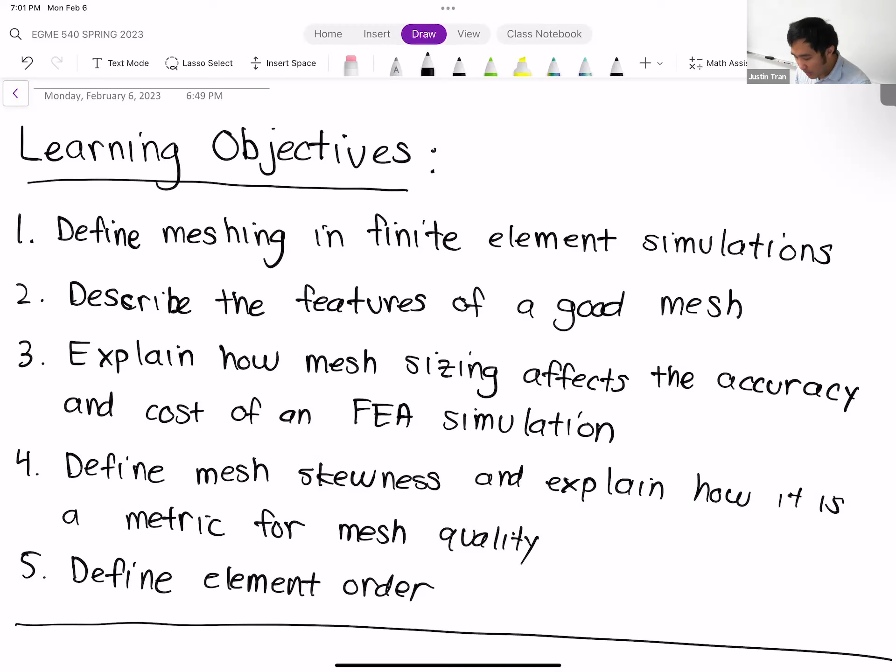So the topic for today is going to be meshing. In particular, we're going to be talking about what I call meshing basics.

In reality, meshing is a very deep topic. It's probably the most that we can talk about in this class in terms of ANSYS. There's a lot we can talk about with meshing, and we are going to revisit it several different times in the semester. But for this first part of the class, I think I'd talk about what meshing is in general, what the purpose of it is, what we're looking for in the mesh, just to help us with our first few activities.

All right, so first let's define what meshing means. The act of meshing in a finite element context is to take your complicated geometry, your complicated CAD model, and break it up into a bunch of simpler geometries.

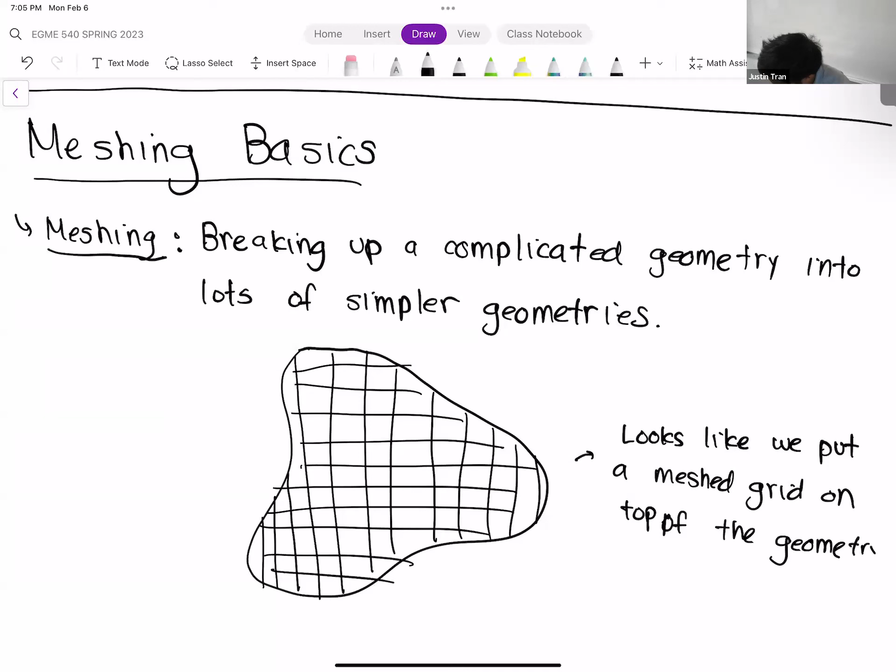And so the reason we do this is that the finite element algorithms, the algorithms that are programmed into the computer, work in such a way that you solve the governing equations on a geometry with a fixed orientation, okay?

You can almost consider it hard coded into the FEA code. The FEA code knows how to solve the structural equation on a square and a triangle. It's kind of designed to do just that. So basically what the FEA algorithm says is, if you can get the geometry into a situation where you have a bunch of triangles, then it'll allow you to solve for the solutions onto those triangles. That's the reason we do that.

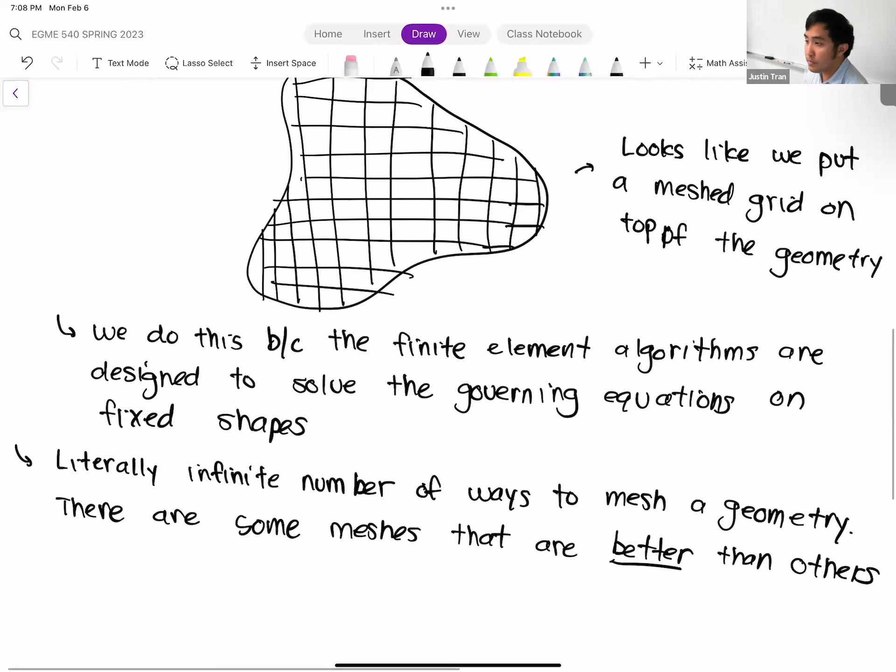So what we're going to be talking about today are just some of the basic indicators that tell you what makes a mesh better than another one, what you're going to generally be looking for in a mesh, so you can get started with that analysis. Any questions on this so far?

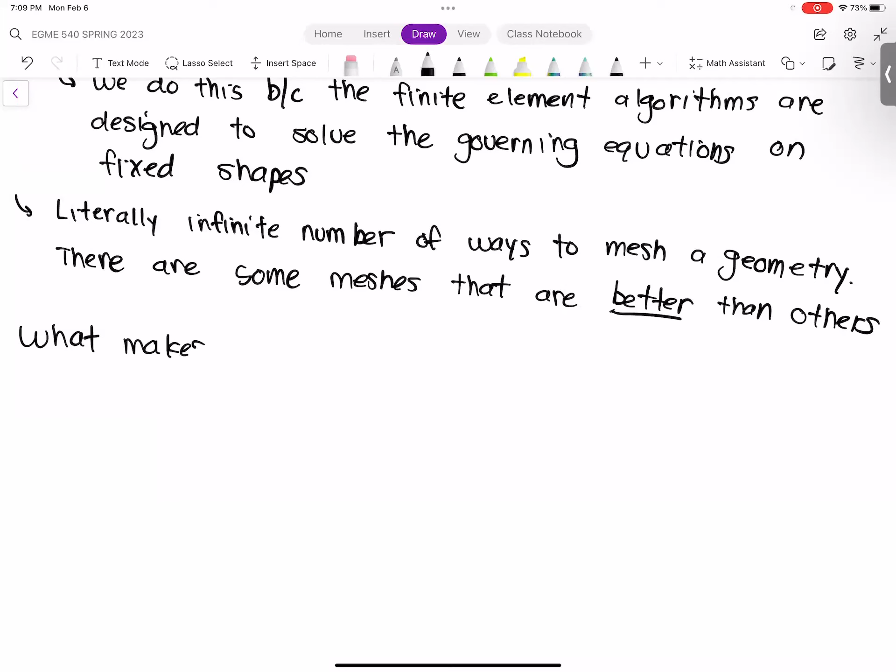So the next section is going to be titled: what exactly makes a good mesh?

Hello, can you hear me?

It's a very loaded question, but I think we can give a simple definition. Simply put, I think what makes a good mesh is one that will produce an accurate finite element simulation result.

Oh, sorry about that. I think it's been muted since last week. I haven't been able to get any microphone output since then. It sounds good, sorry about that. If you want to type your questions in the chat, that's probably the best way. I appreciate you guys trying to help me out, that's very nice of you. Check your audio settings, speakers. Can someone try speaking, maybe see if that works? Okay, yes, I just had to switch the speakers. I was trying to speak up, but I want to say thank you to my classmates online in Zoom who got your attention, I greatly appreciate it, that's very nice of you.

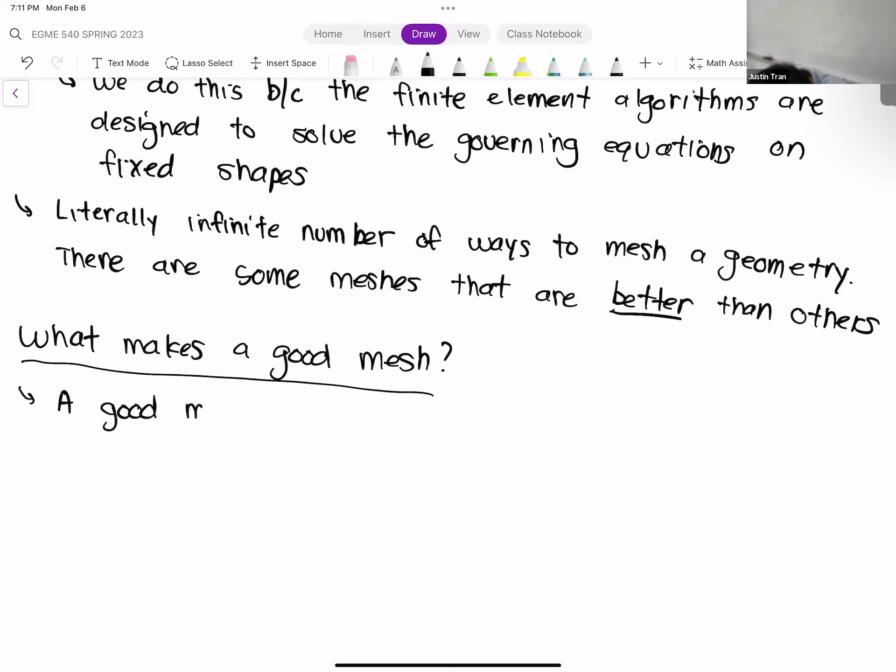So what makes a good mesh? A good mesh is basically something that will produce a simulation that is as accurate as possible with the least amount of cost as possible.

So it kind of sounds like you're shopping for laundry detergent, right? You want to buy the detergent that'll get your clothes the cleanest for the least amount of cost, but that's kind of what it ends up being. I've underlined two words there because I want to focus on those, and how your mesh influences the accuracy and influences the cost of your simulation.

All right, so let's talk about accuracy first. When we talk about accuracy, what we refer to is basically how closely your finite element simulation reflects or emulates the realistic situation it's trying to simulate.

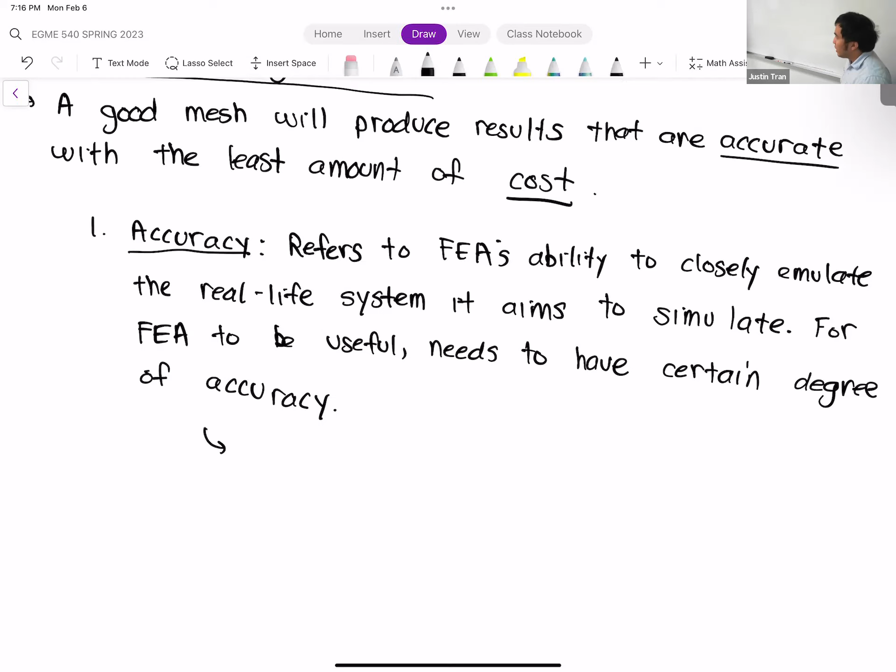So we're going to talk about something called a mesh convergence test. That's a test you can do without any real world data to show that your simulation results are as accurate as they can be for your mesh. There are tests like that to test and see you've at least eliminated a lot of the sources of common error in FEA. Sounds good. Thank you, sir.

Right. And so how does the mesh affect your accuracy? Generally speaking, the smaller your elements are, the more accurate your simulation is going to be.

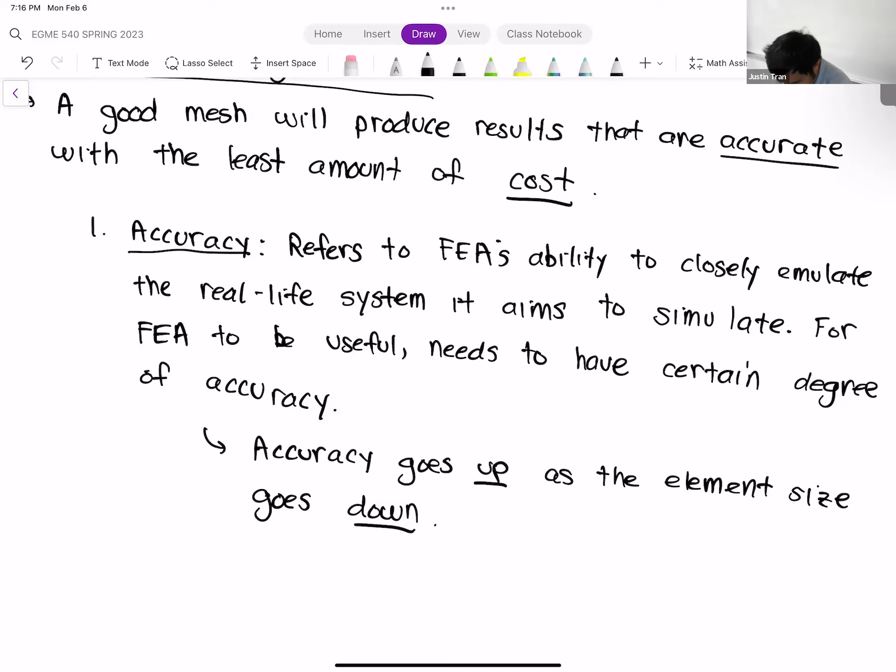And so the smaller you make your elements, generally speaking, it's going to increase the amount of elements in your mesh. So as the element size goes down, then you can expect the accuracy to go up. And the reason for this is that when you run an FEA simulation, what FEA is doing is forming an approximation for what the solution is going to look like on that element.

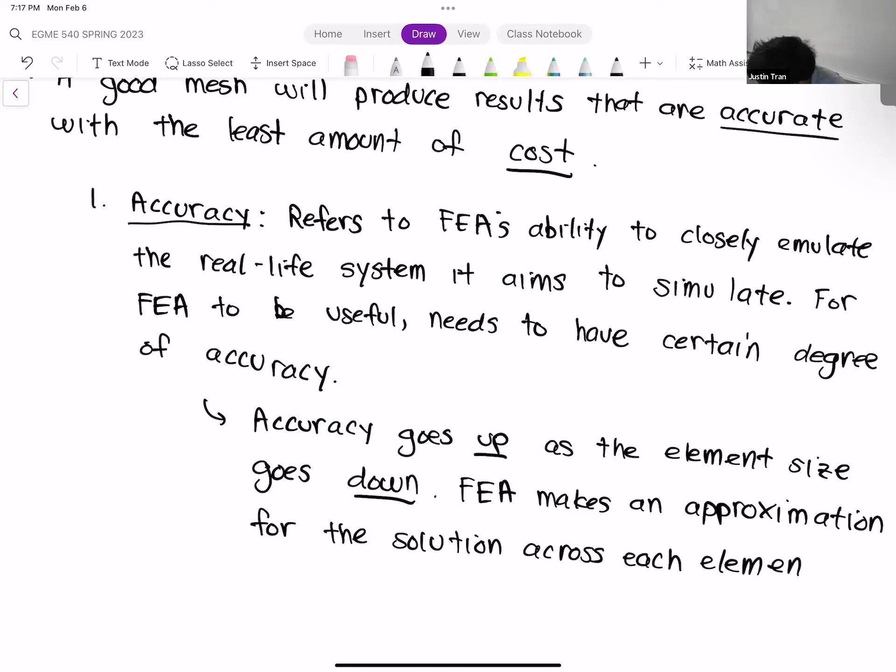And so by reducing the size of the elements, by making the elements smaller, you're basically reducing the amount of approximation it has to do. So in other words, to sum this up, from an accuracy point of view, you want smaller elements because that's what's going to give you a higher quality, more accurate simulation.

So accuracy is the first main consideration to make when you're making your mesh. The other consideration to make is cost. By cost, I don't mean financial cost, although you can interpret it that way. By cost, what I mean is mostly time and memory.

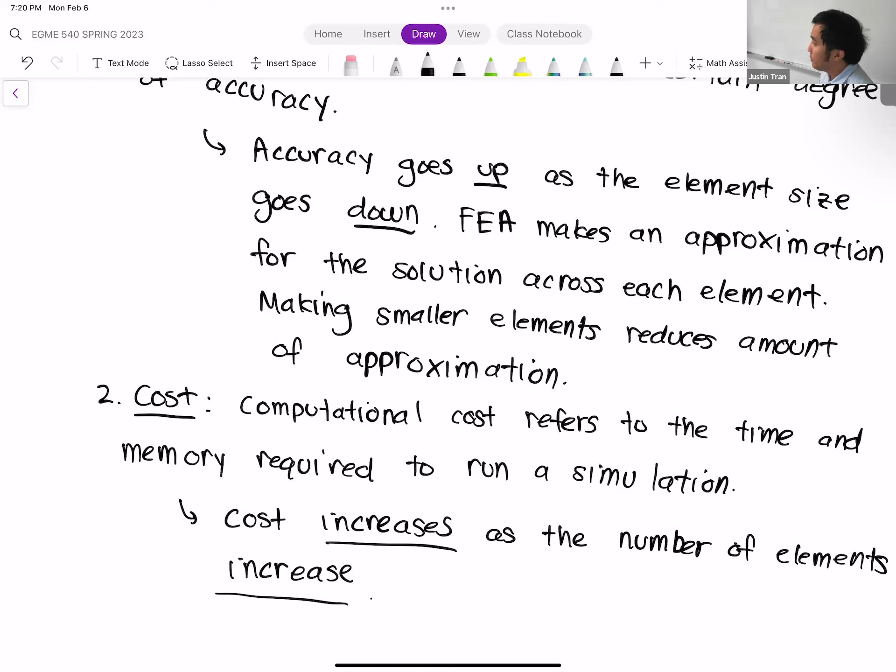And so if you remember from the first activity, one thing I had you do for each mesh was log down how many elements are in the mesh, how many nodes are in the mesh. And so that right there is kind of an indication for how expensive it's going to be.

I will say that for a lot of the simulations we're going to do in this class, you're not really going to notice a difference in the cost. So you're going to run a simulation on maybe a 5,000 element mesh, and then run the same simulation on 15,000 elements. You're not really going to see that big a difference. It might be a difference of like 30 seconds or something like that.

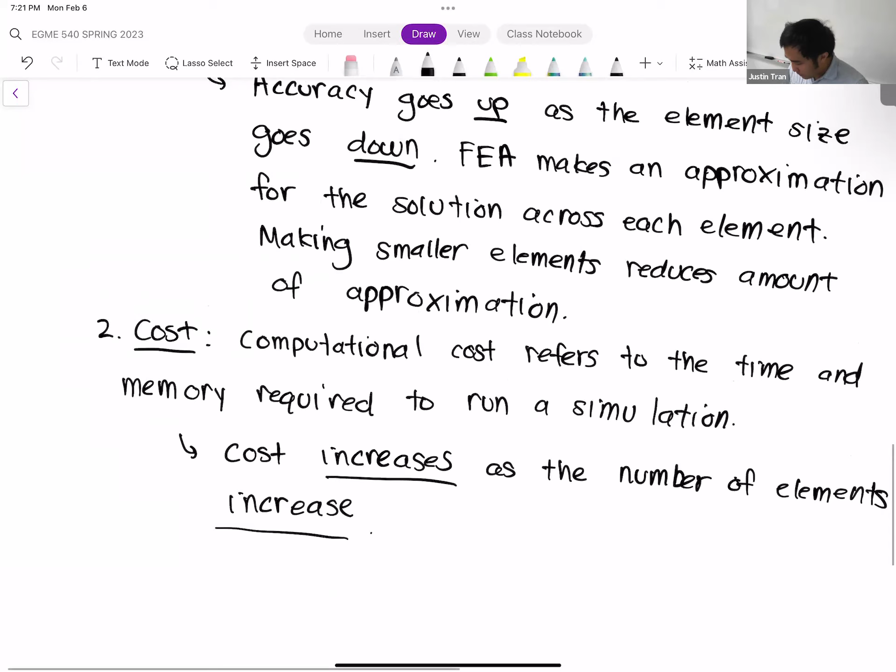And so that may seem insignificant, but for a lot of practical cases, when you're looking at meshes with element counts in the millions or even tens or hundreds of millions, that's where cost really starts to become a factor, because you're talking about a difference of maybe your simulation finishing in 5 days versus 3 weeks. And so that really becomes an issue.

Okay, so we have these two factors you're considering for the mesh: accuracy and cost. If you'll notice, these two factors are competing. From an accuracy point of view, you want smaller elements, more elements, because that produces a more accurate solution. But on the other hand, you have this cost consideration where you don't want too many elements, otherwise your simulation is going to take forever and blow up your computer. So oftentimes, cost and accuracy are opposing considerations when you're doing an FEA simulation.

Dr. Tran, do you think costs will continue to be a major increase in FEA, even though computers are getting more powerful with time? Do you think that will still be an influencing factor no matter what?

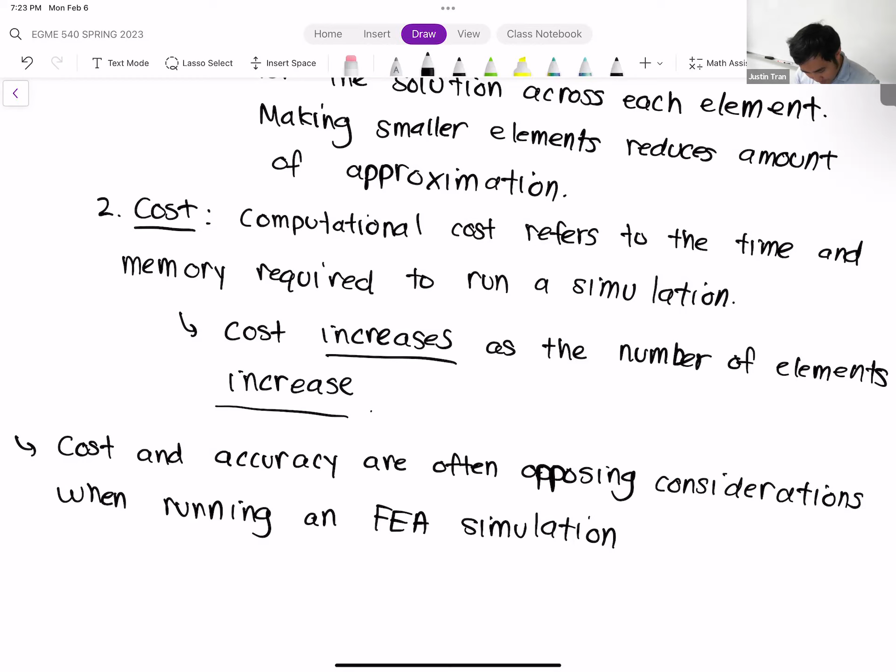I think it's going to keep continuing like that for a very long time, because there are a lot of problems right now which people think are unsolvable because they don't think the computer power is enough. But the computers will get there eventually, and then we'll just come up with more problems that are unsolvable. So it's a never-ending cycle. It's a huge area for research.

Okay, so the question is, if these two are opposing considerations, how do you find the balance between them? Obviously you can't have a very accurate simulation, because that's going to take too long. But you also can't have a very cheap simulation, because that's going to have no accuracy at all. So how do you balance these? Or where do you find the right balance?

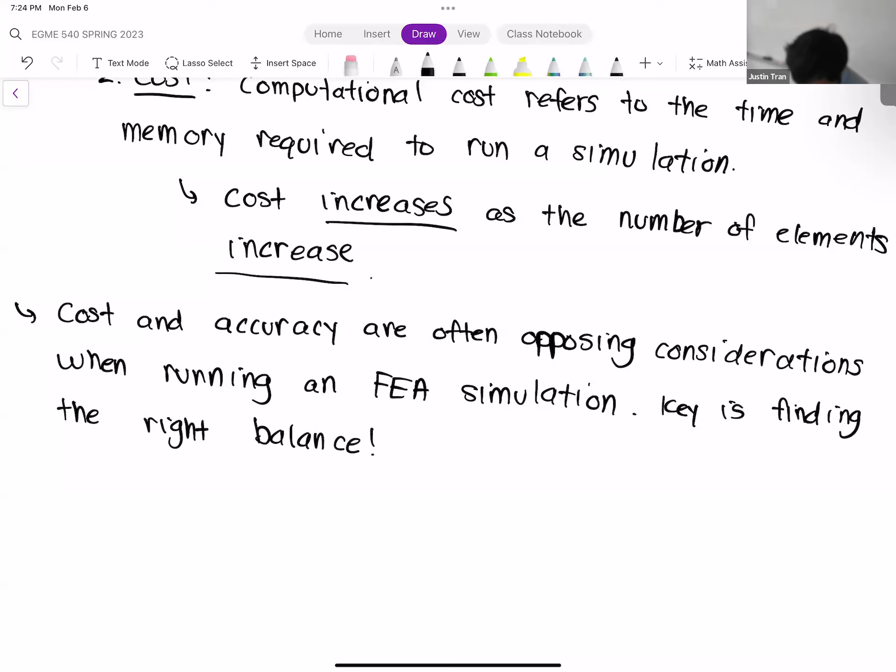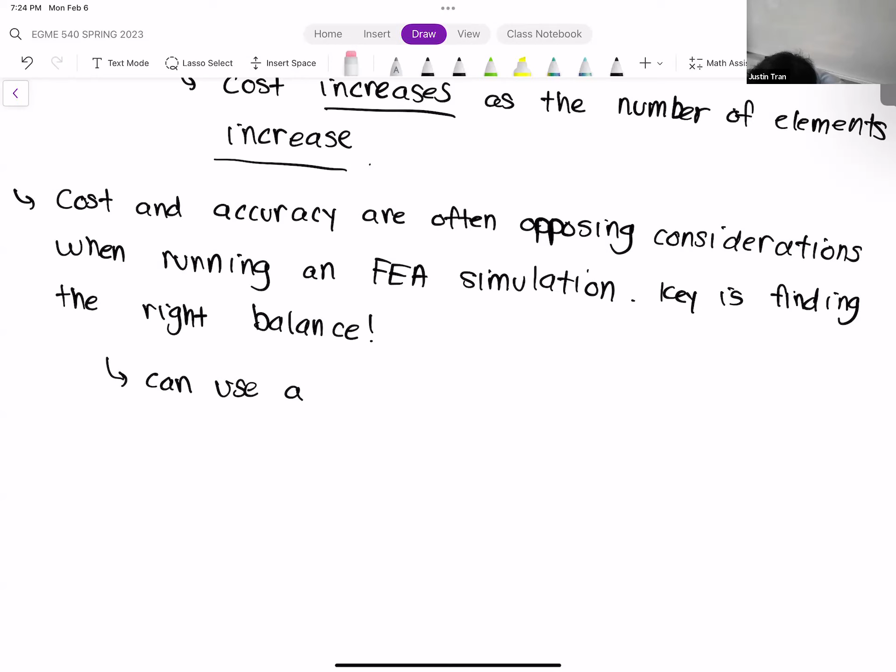All right, so we'll talk about this a lot more later in the course once we talk about verification and validation. But a very common test that people run whenever they're doing any kind of practical FEA is something called a mesh convergence test.

I don't want to write down too much about it, since it won't be relevant until later. But basically, with the mesh convergence test, you run the same simulation over and over again on different meshes. You typically start with a fairly coarse mesh, with very few elements, run the simulation, and record the results. Then you successively increase the resolution of the mesh and rerun the same simulation, looking at how your results change. Eventually, once you refine the mesh to a certain point, refining it even more won't change the simulation results. At that point, you've reached what's called mesh convergence, meaning your simulation no longer depends on the mesh, and you've reached the maximum accuracy you can with that mesh.

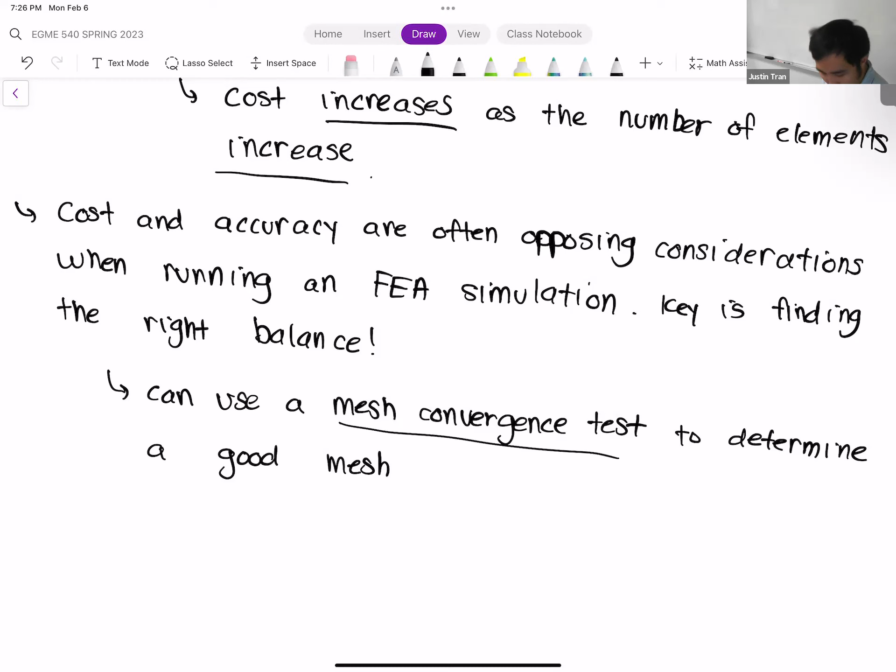So if you're going to do any kind of technical reporting or research with finite elements, a mesh convergence test is almost necessary, because that's always the first question people ask: is this mesh accurate enough for what you're trying to accomplish? A mesh convergence test is the best way to determine that. We'll talk about that a lot more later on in the course. I don't think it'll be part of your midterm project, but it will be part of your final project, so we'll discuss it closer to that time.

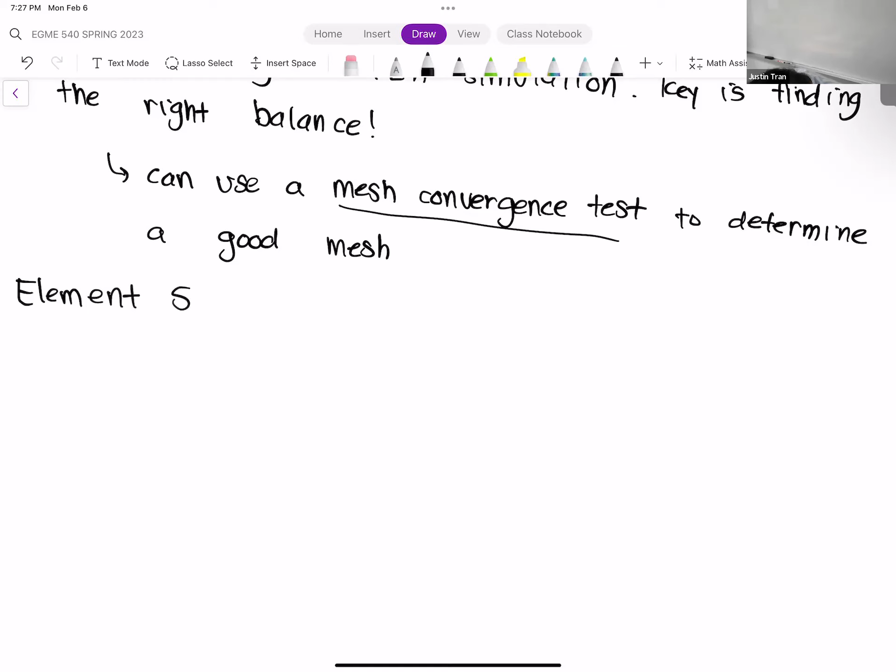For now, the only thing you have to keep in mind is this relationship between cost and accuracy. So when you're choosing your mesh size, you have to do it thoughtfully, knowing that when you make the elements smaller, you're increasing the accuracy, but you're also increasing the cost at the same time. Any questions on this?

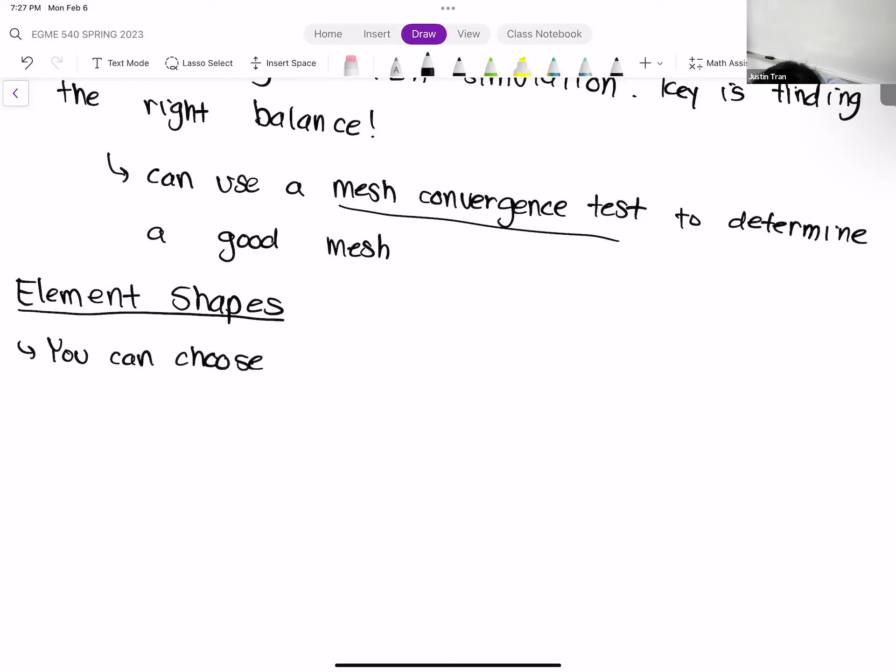All right, so let's talk about element shapes. Just like I alluded to earlier, when you're creating a finite element mesh, you have some latitude in terms of what shapes you can choose for your finite elements. In reality, in theory, almost any shape can work as long as you can write the algorithms for it. But for most practical situations, we have two categories of shapes that you can choose.

I call them categories because they have a 2D version and a 3D version, but they have very similar behaviors. The two categories are the triangular shapes and the rectangular shapes. Let me draw a table here to show you their differences. There's a 2D version for these and a 3D version. First column here, we'll do triangular shapes, and then on the right will be the rectangular. Okay, so let's start with a 2D triangular shape.

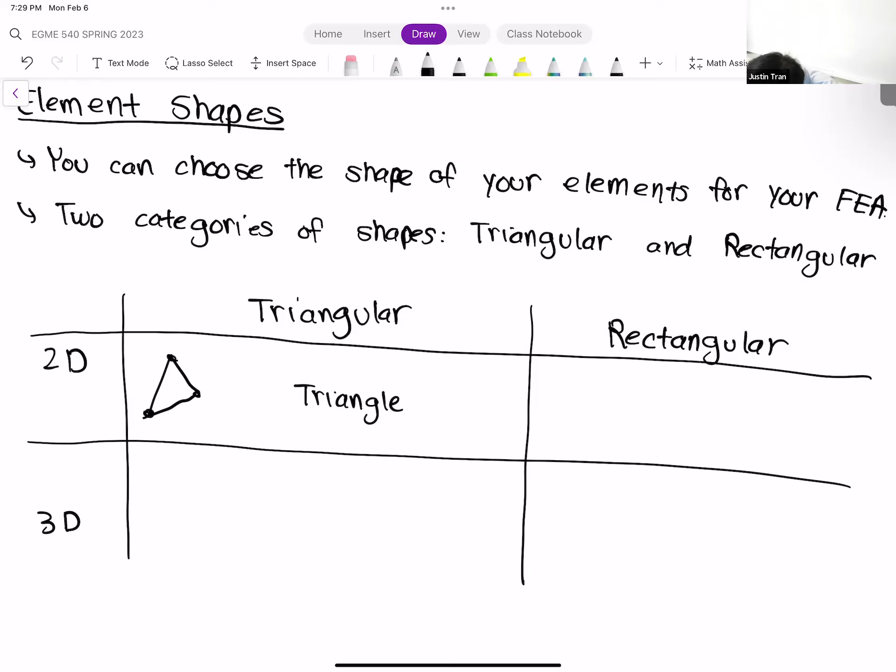This was pretty straightforward. A 2D triangular shape is literally a triangle. And then the rectangular 2D shape is a rectangle. Big surprise. But we usually call this rectangle a quadrilateral because it has 4 sides and 4 corners.

Dr. Tran, this popped up into my head seeing those two drawings. Is it safe to say that a triangle is more accurate than a rectangle because it's half a rectangle, quote unquote? Not necessarily. We'll talk about their differences soon. Let me get through the 3D one and we'll talk about where the triangular shapes are better than the rectangular ones, because they're good in certain situations.

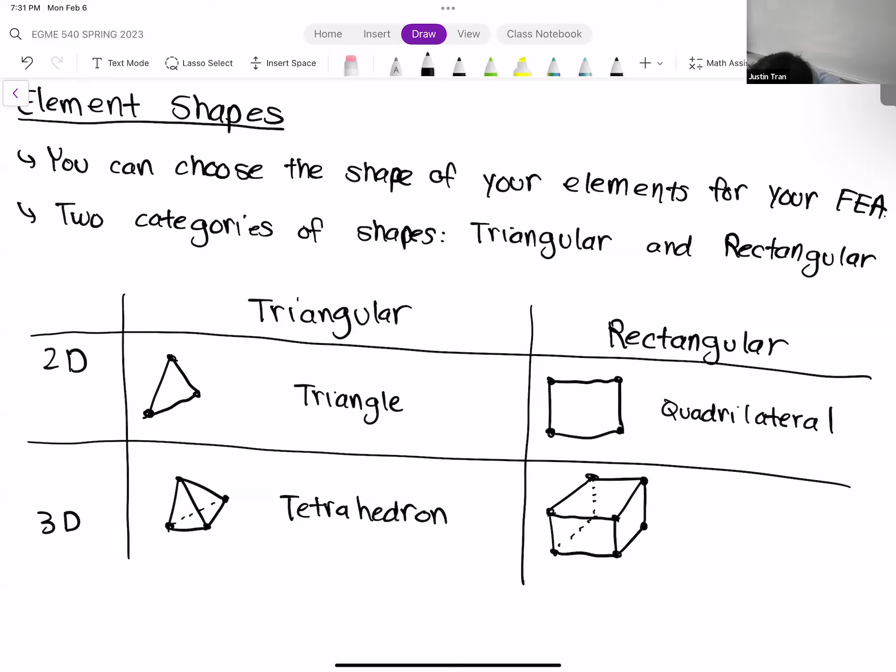Okay, so the 3D triangular shape is a 4-sided pyramid, and this is often called a tetrahedron. And the 3-dimensional rectangular shape is a box. Some people call it a brick, but we call these hexahedrons. Hexahedron because they have 6 sides, basically.

So these are your options when you're choosing element shapes within ANSYS. I think a lot of custom codes have the ability for other shapes, but generally this is all your options. So what are the differences between these shapes besides their visual differences? Let's talk about the triangular shapes first. This applies to both the 2D triangle as well as the 3D tetrahedron.

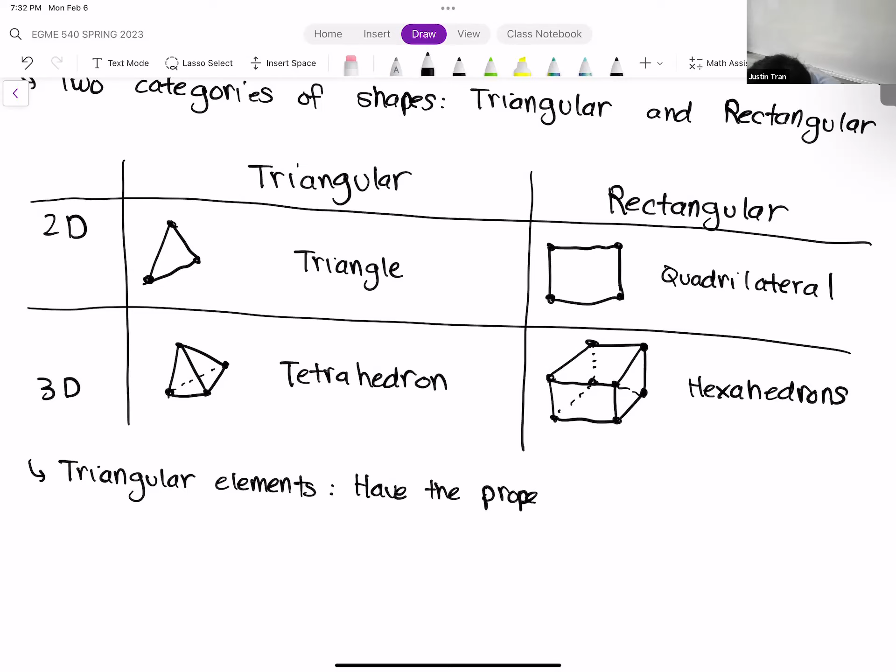The really nice property about triangular shapes is that they have what's called the simplex property. What that means is that if you wanted to, you can take any geometry, literally any geometry, and you can mesh it with triangular elements.

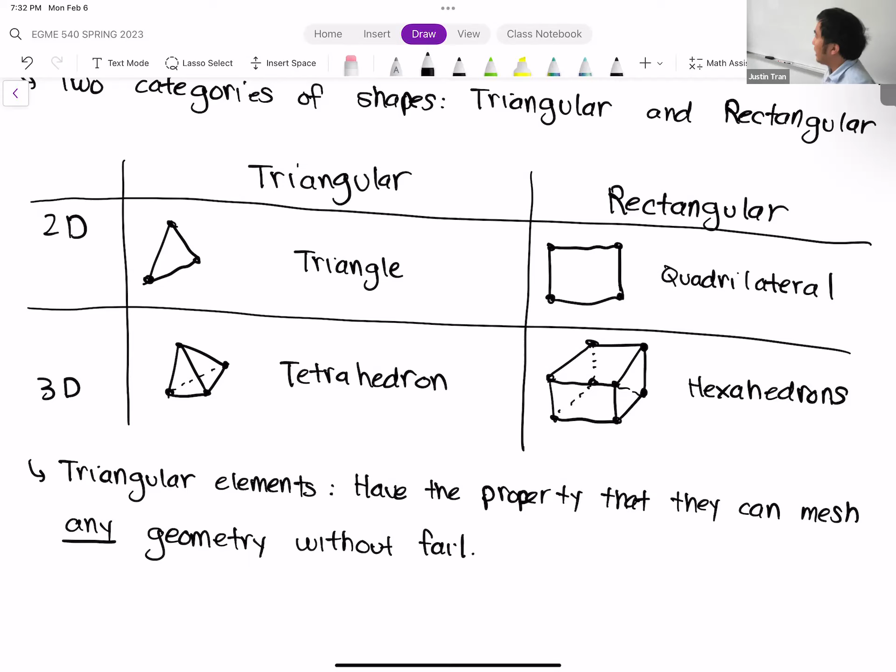You guys have a question over there? And the reason for this is that, like I mentioned, this is something called the simplex property, and what that basically means is that you can fill any space with triangles. Dr. Tran, can you please write that down? The simplex property? I'm writing it down right now. Thank you, sir.

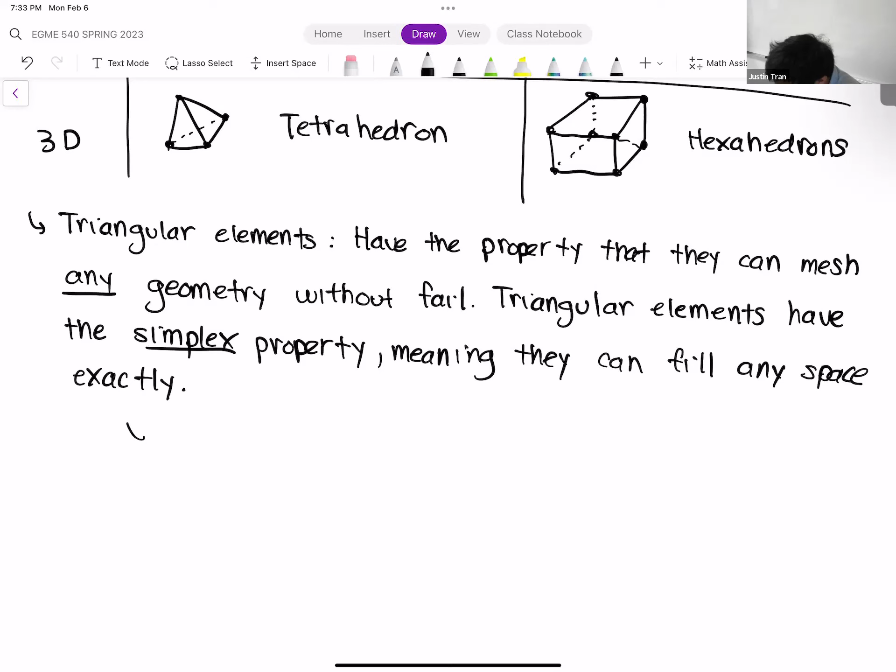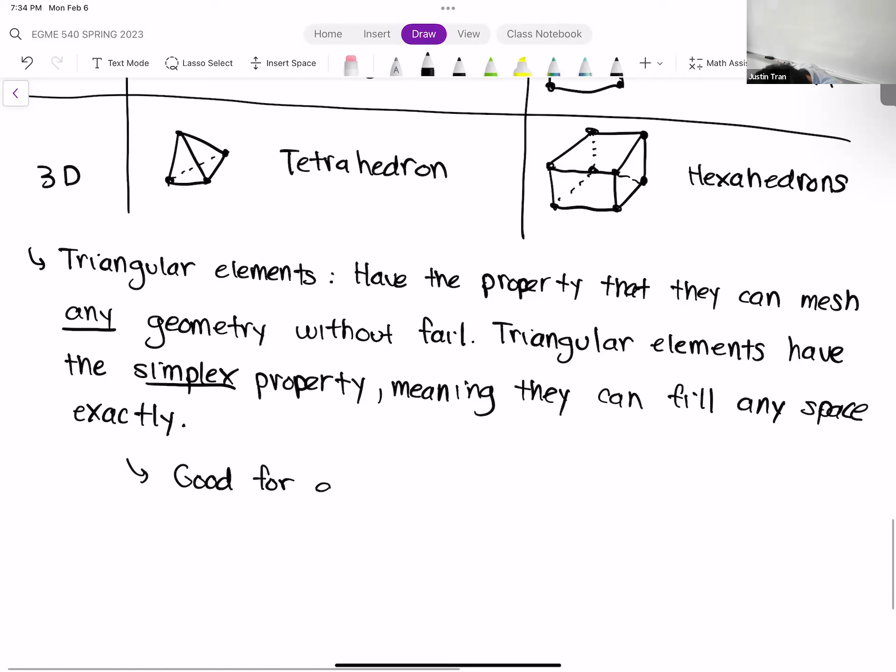All right, so how can we take advantage of this? From a practical perspective, we can take advantage of this whenever we have a very complex geometry. If we're doing an FEA simulation and our geometry is very complex, with a lot of fine features, twists and curves and things like that, normally you're going to want to start with the triangular mesh, because that mesh is going to match your geometry exactly.

Sometimes in ANSYS, even if you specify a rectangular element like a hexahedron mesh, if it's really struggling with the geometry, you might think ANSYS is disobeying you by putting a triangular mesh instead. That's not necessarily the case. It usually happens because ANSYS tries its best to do a rectangular mesh, but the geometry may be too complex or the size too big, so it just defaults to triangle.

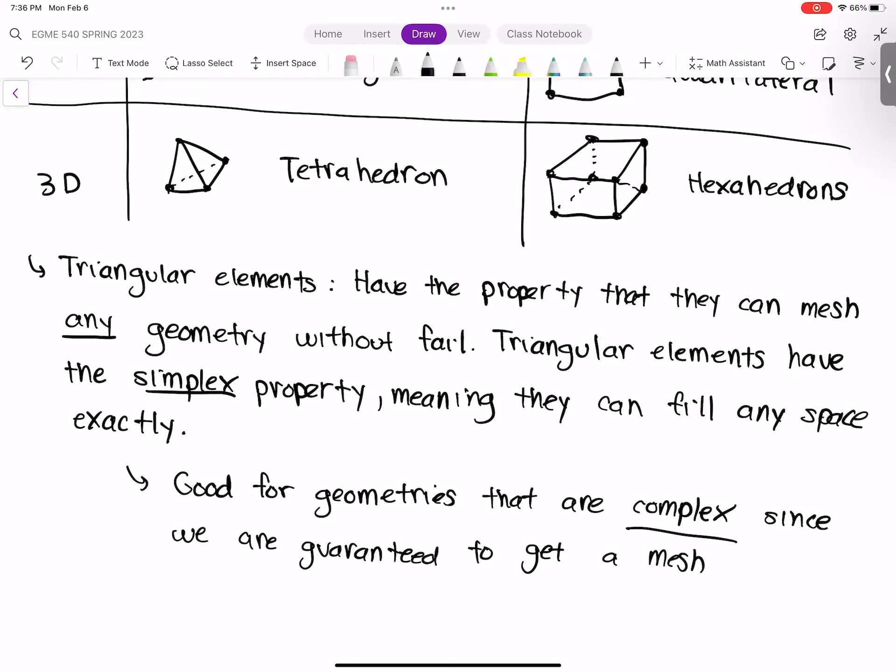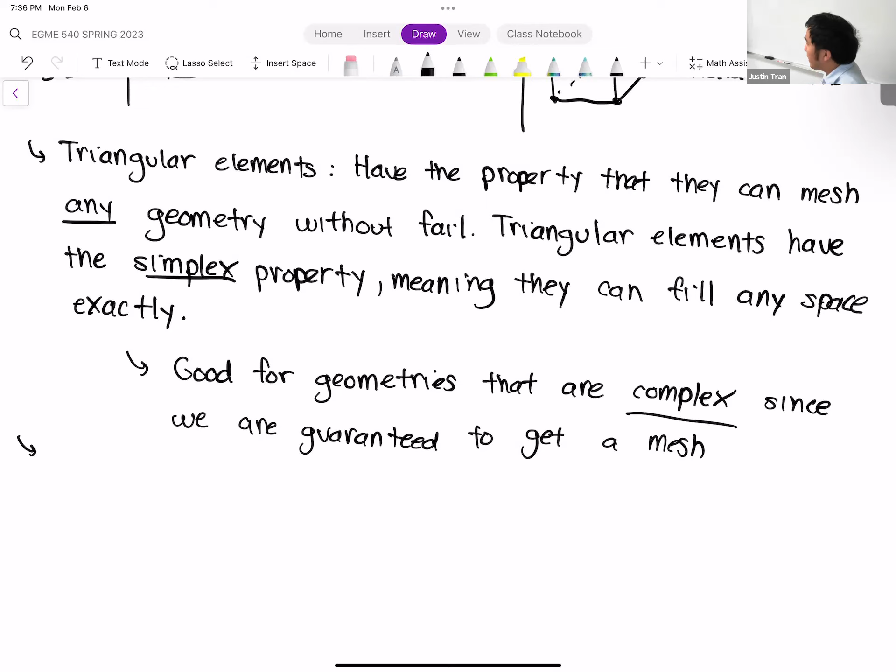Is it ever possible to use triangles and rectangles in the same mesh? Yeah, of course, we'll talk about that later. It's called mixed meshing, and you can definitely mix different element shapes and even different element sizes in different parts of the geometry.

Triangular meshes are always a good starting point. Usually when you're first making an FEA, doing a triangular mesh is not a bad idea. You're almost guaranteed to get a mesh out.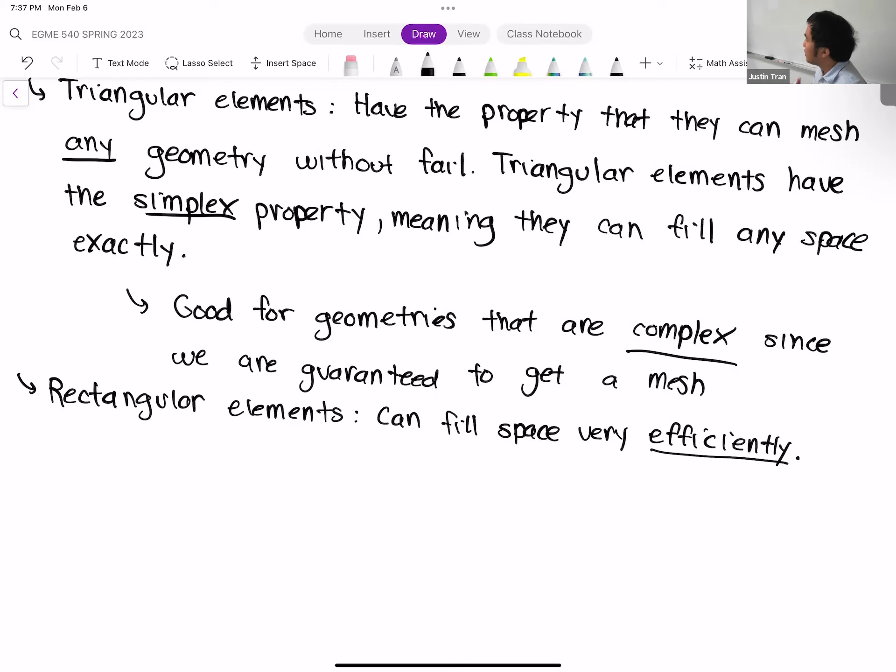When would you want to use a rectangular mesh instead? Rectangular elements fill space very efficiently. Because they're naturally a bit bigger than triangles, if you keep the mesh size fixed, you'll get a mesh with fewer elements using rectangular versus triangular elements, so it's much more efficient at filling space.

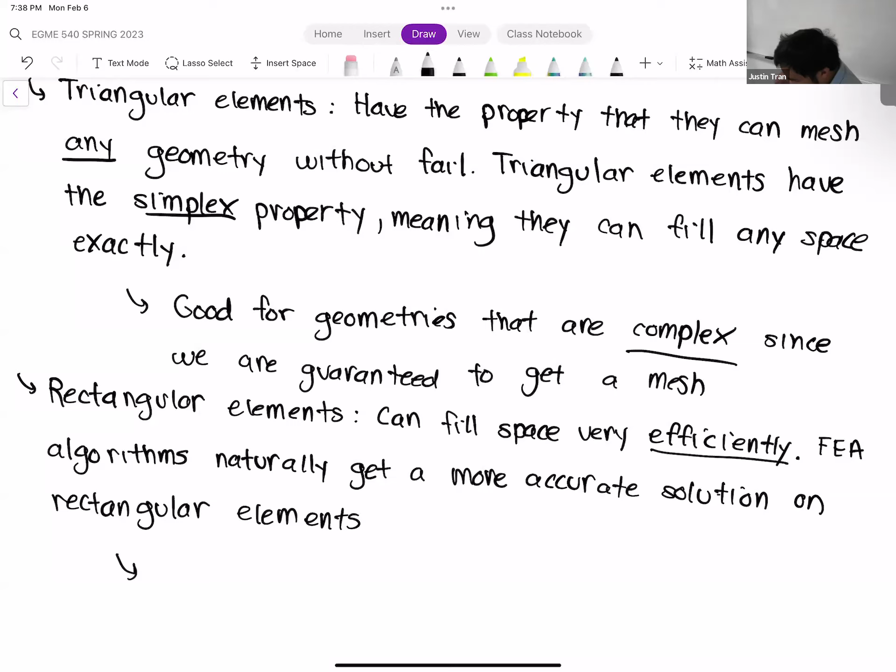Another nice thing about rectangular elements is that they have very nice solution properties. Basically, the FEA algorithms naturally get a more accurate solution on rectangular elements versus triangle elements. So the upshot of both of these things together is that you can get a more accurate simulation with fewer rectangular elements compared to triangular elements.

Is that true for all complex geometries? We'll talk about that. The caveat with rectangular elements is that you're not able to get a mesh using them all the time. If you have a complex geometry, you may be able to do some parts with rectangular elements, but not all of it. So generally, use rectangular elements if you can, but sometimes you're just not able to because the mesh isn't able to form.

So from my understanding, some simulations work with rectangles, some with triangles, and some with both. Generally, if you have a geometry that lends itself well to rectangular elements, it's preferred to use them because you'll fill the space with fewer elements, get a more accurate solution, and it will cost less.

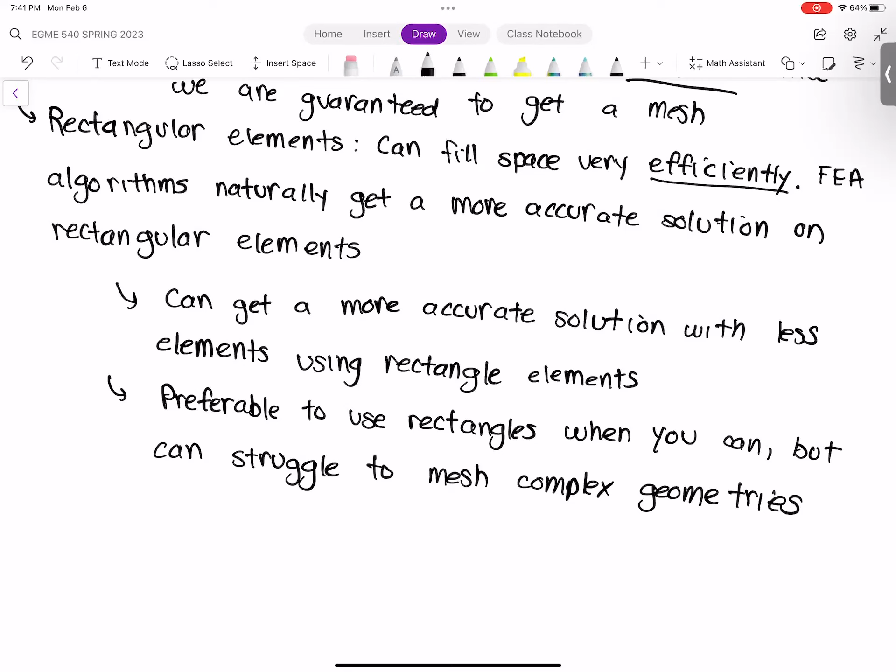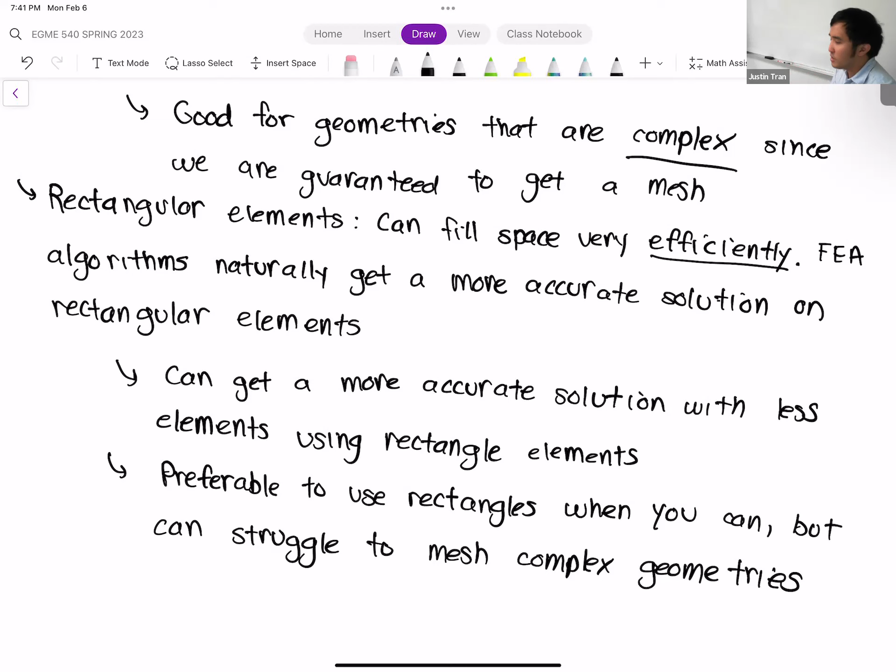The upshot is that the types of geometries that work well for rectangular elements are geometries that look rectangular. If you have boxy elements with straight faces and straight edges, that tends to be easier to mesh with rectangles. But if you have a lot of curved edges or sharp corners, rectangular elements really struggle in those cases. It's hard to describe precisely with words, so it ends up being fairly general, like what I just said.

But as you start to use it more, as we go through the activities this semester and the projects, you'll start to get a sense of which geometry will work with rectangles and which won't. It's more of a feel kind of thing. As we go through the semester, you'll get a general feel for it. But I wanted to introduce it now so you have the idea and the trade-offs between the two shapes.

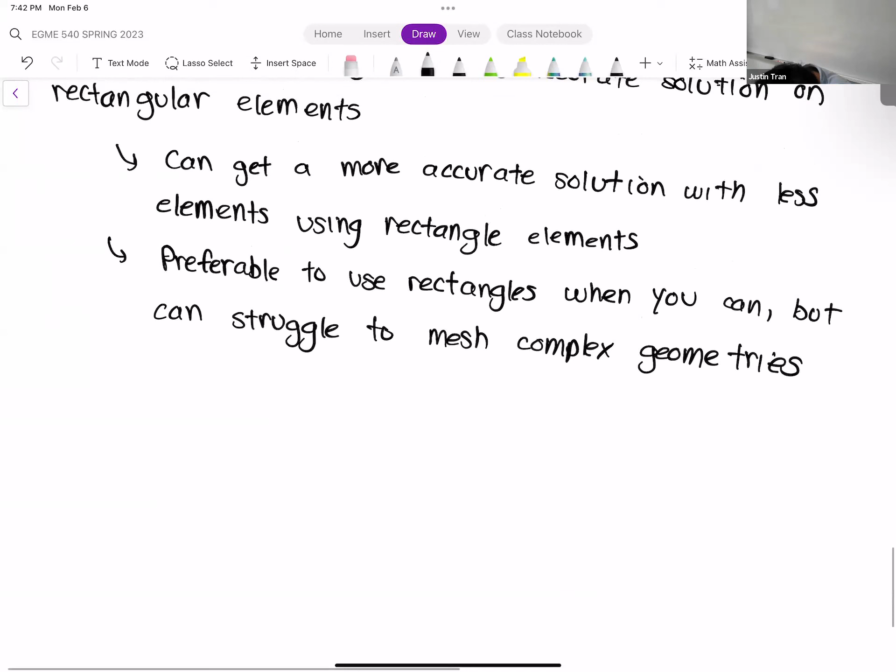Okay, any questions on this?

Okay, so let's talk about mesh quality or skewness. Quality is a very specific definition, and you could argue that we can talk about mesh quality all day. But when someone mentions mesh quality, they specifically are talking about the quality of each individual element.

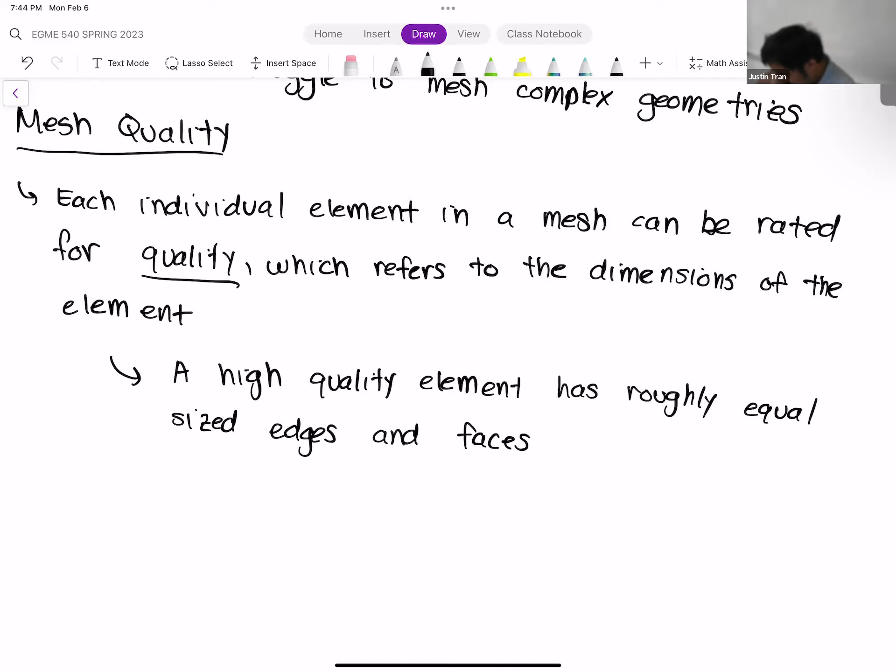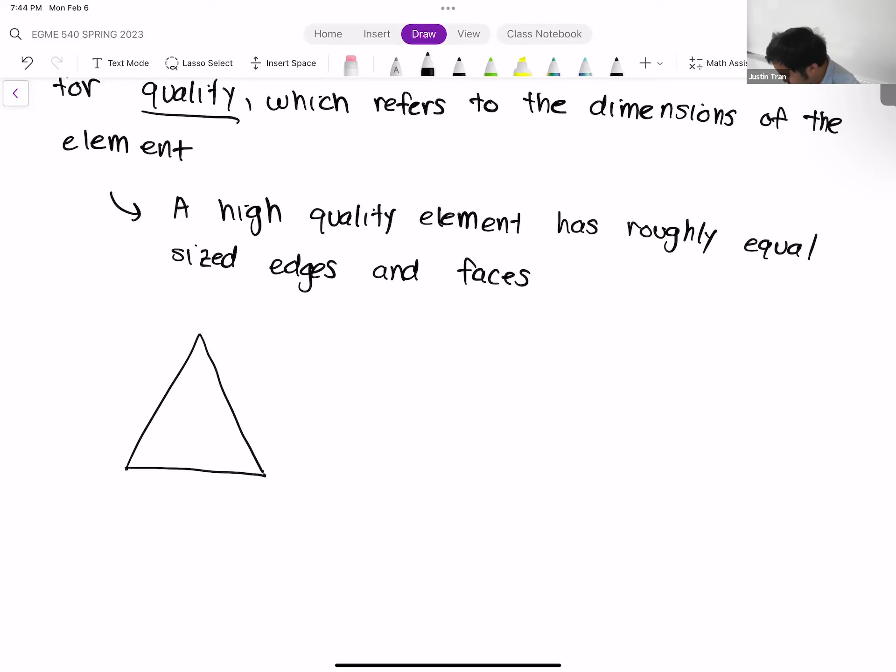In other words, the perfect triangular element would be an equilateral triangle. Look—this is a high quality triangle. All the edges are roughly the same size, and the interior angles of the triangle are all roughly the same. So this would be high quality.

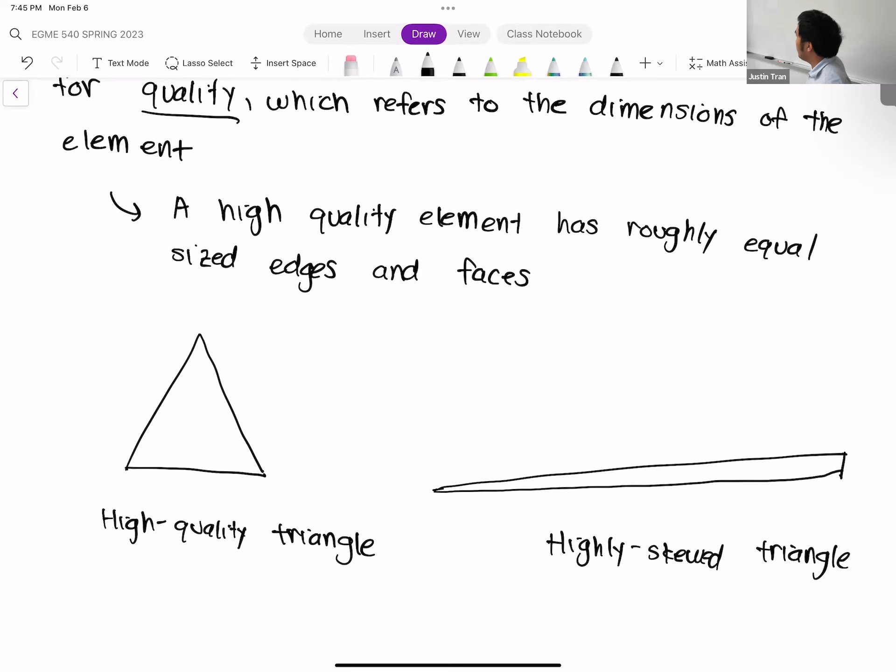There are three-dimensional versions of this too, with highly skewed rectangles as well. But generally speaking, for a high quality solution, you want high quality elements.

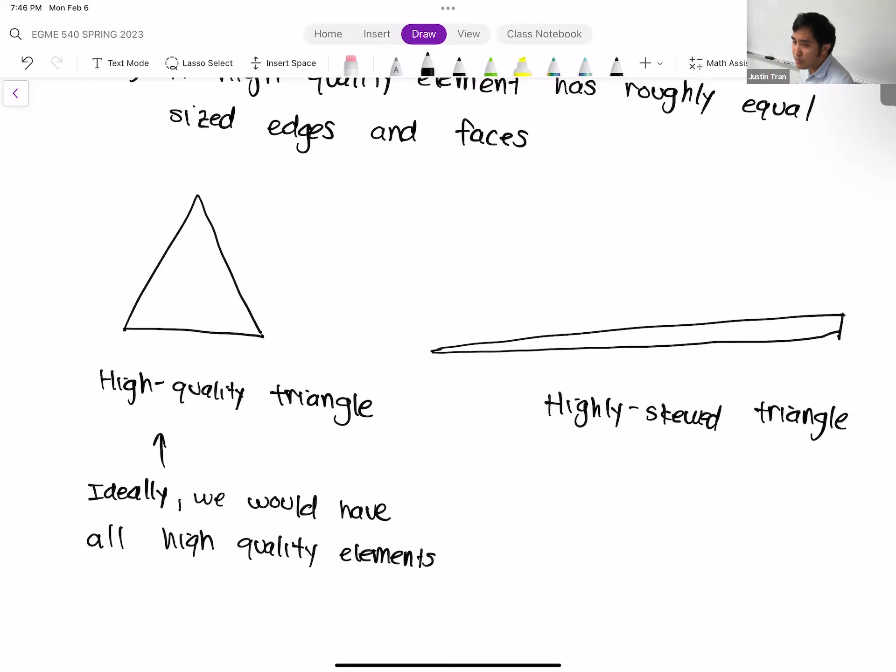What can tend to happen for highly skewed triangles or highly skewed element shapes is that they tend to produce weird irregularities in the solution just because of how skewed they are, since some edges may be significantly longer than others. The one I drew here is actually not that bad, even though it's very different from the equilateral one. You can have meshes with elements that have edges up to 10 or even 100 times bigger than their shortest edge.

The way you can rate this—whenever you produce a mesh, it's always good to check the quality of the elements. You can use ANSYS to check the quality, and ANSYS does a very nice job of this.

There are lots of different metrics for quality, lots of different things you can do, but generally the one that I like to use is something called skewness.

What ANSYS will do is that after you produce a mesh, it'll look at every single element in the mesh and produce its skewness score. The way to read the skewness score is something like this: if you have a skewness of about 0, that means the element is high quality. Generally you would want a skewness of 0 for every element.

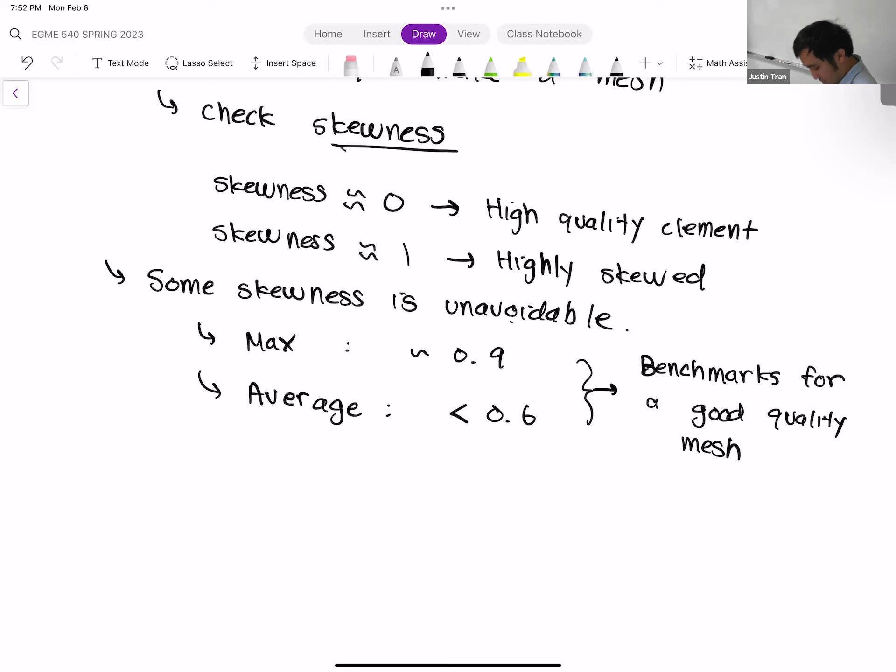Going back to our element shapes a little bit, one nice benefit of using a rectangular element mesh is that those tend to not skew themselves all too much. For triangles, even though the triangle was able to mesh any geometry, you might end up with a situation where you have a few triangles that are very highly skewed. Rectangular mesh generally doesn't tend to do that, but the bad side is the rectangular mesh will just kind of give up before it reaches that point. A rectangular mesh will sometimes fail, so you might never reach a situation where you have a highly skewed rectangular mesh, because it may not even mesh to begin with.

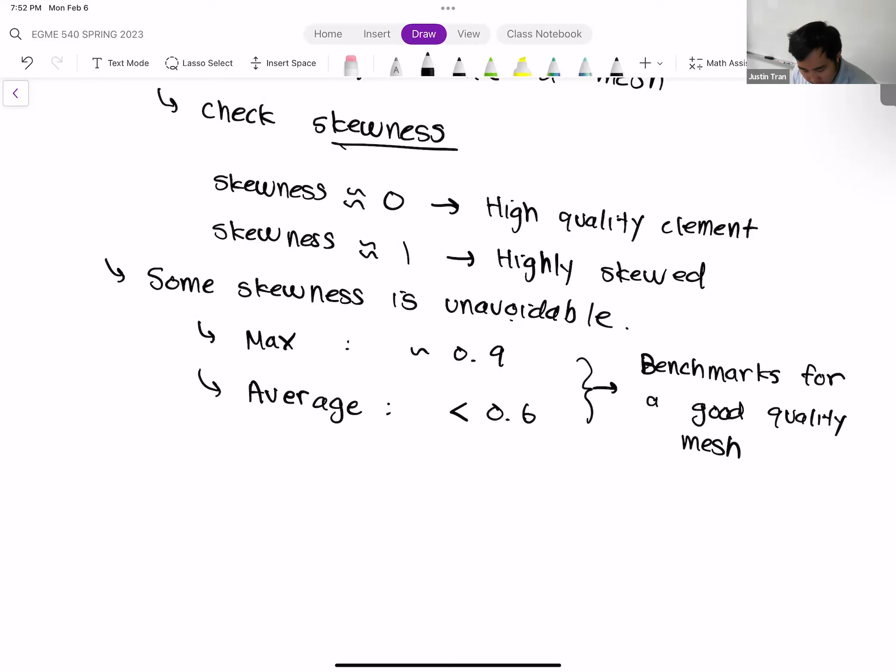Any questions on this? Yeah. Does it create a heat map of the skewness? I think you can set it to be, but generally the only thing you really need is just the max and the average. But there are ways you can view a heat map, and that can be useful: if you're getting mostly highly skewed elements in a certain area, that'll tell you that you need to work on the mesh in that area. Exactly, yeah.

We may not get to mixed meshing today, but I did want to talk about element order before we go for today.

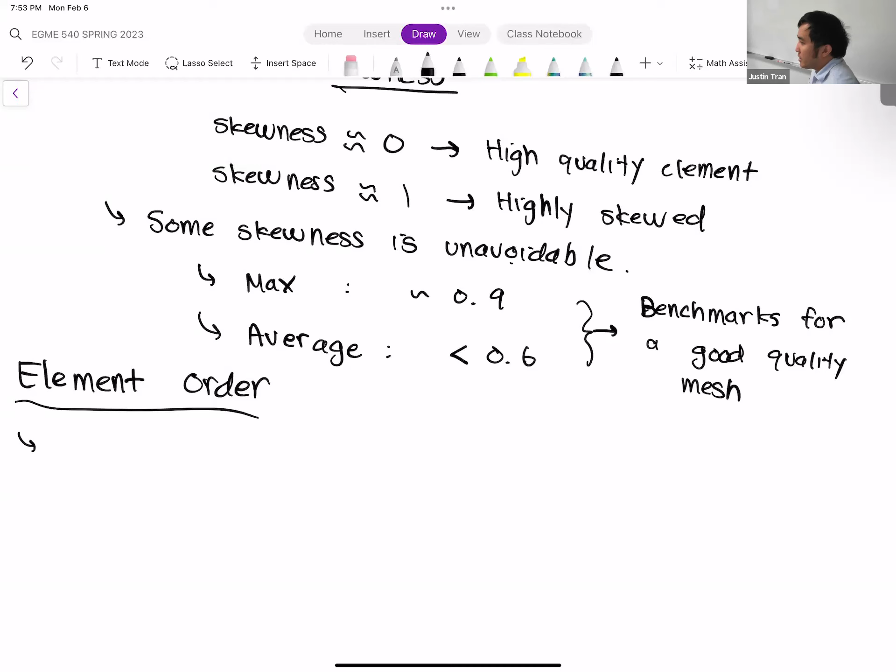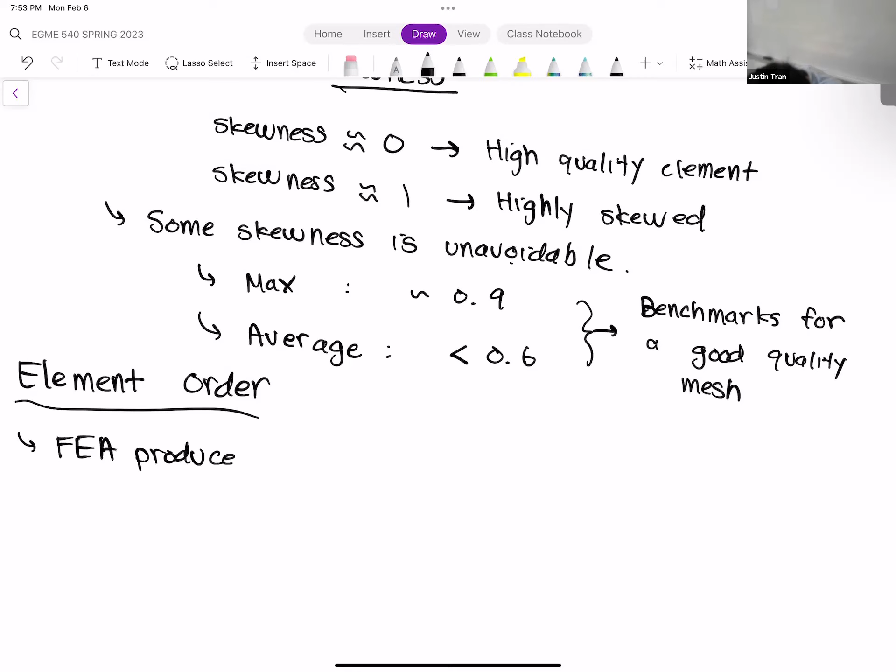Another consideration you have to make for the mesh is its order. This one's a little bit harder to explain without diving really deep into the theory. For those of you who have taken 541 with me, you probably know exactly what I'm about to say regarding order, but without going into the theory it's a little hard to explain. I'm going to do my best to give the 10-minute or 20-minute version of element order. When you're solving an FEA problem, we know that FEA is an approximation to an exact solution.

We know that whenever we solve an FEA, there's an underlying differential equation, and FEA is going to solve for an approximate solution to that equation. The way it accomplishes this is that it solves the equation in reverse. Usually when you solve an equation, you look at it and go through a method to get the solution from there. The way FEA works is that it looks at the equation, assumes a form of the solution, and then finds the best solution that fits and can solve that equation.

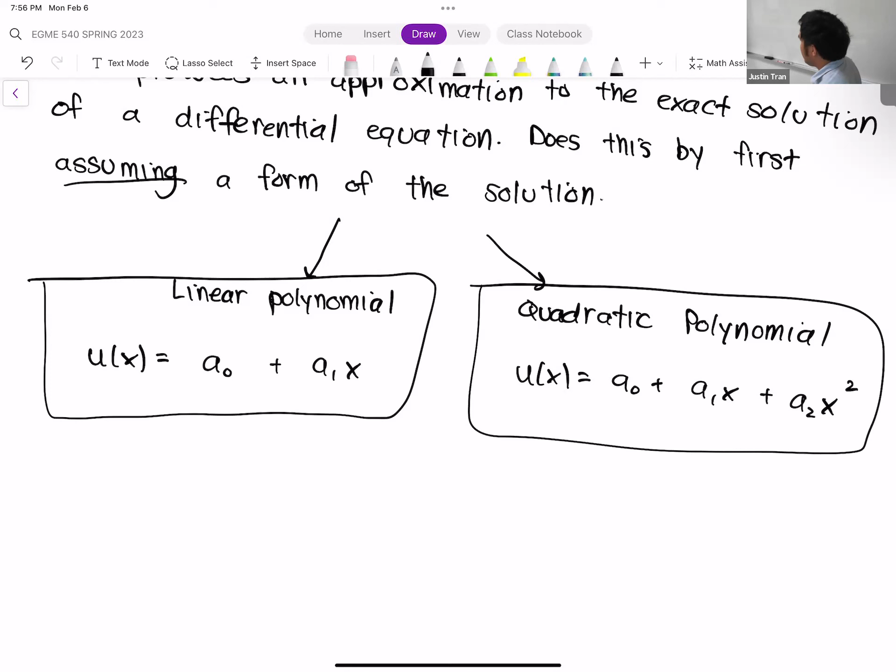There are two forms that we basically usually work with in FEA, especially in ANSYS. One form is a linear polynomial, and the other is a quadratic polynomial. In reality, you would have a 3D linear polynomial and a 3D quadratic, but for the sake of simplicity I'll just do the 1D version. A 1D linear polynomial, we'll call it u of x, will have a constant term as well as a linear term. The quadratic one, u of x, will be a0 plus a1x plus a2x squared.

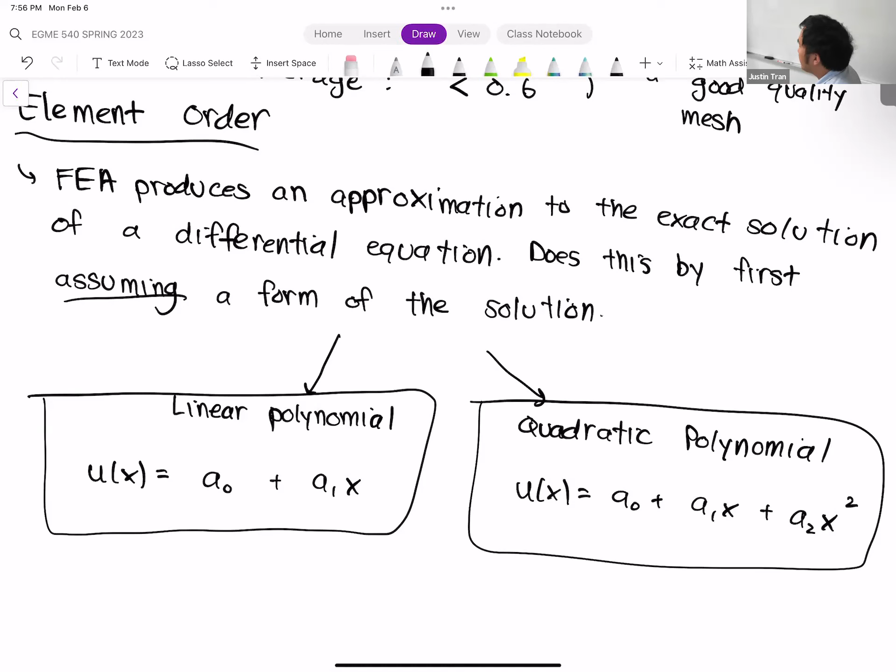So FEA is going to assume one of these forms of the solution and then find the best version of this assumed form that's going to solve the equation. When you're running an FEA simulation in ANSYS, you can actually choose the assumed form of a solution.

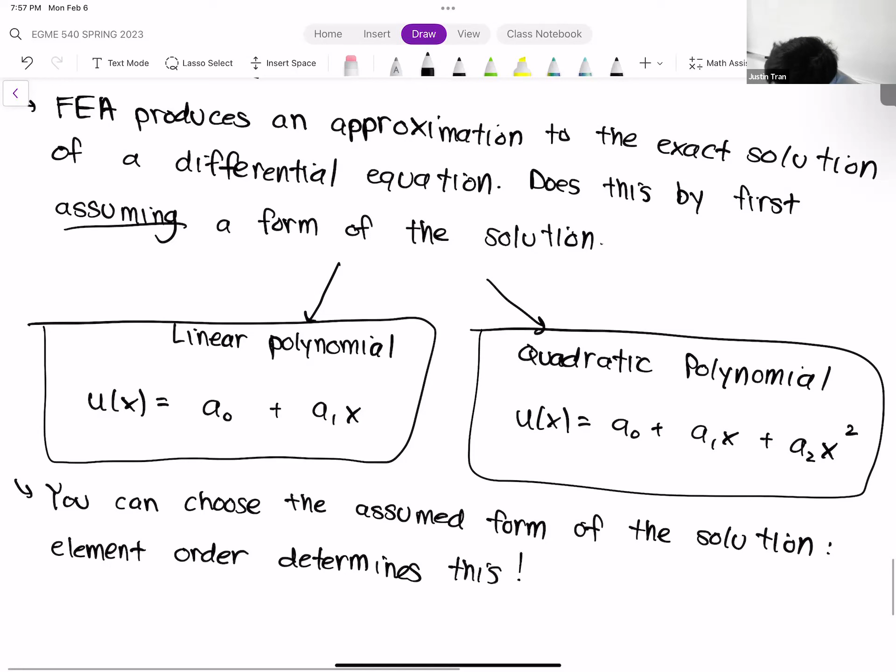Okay, and the way that you choose that is you choose the element order. The choices that you have for element order are either linear or quadratic.

Generally speaking, the choice goes a lot deeper than this, there's a lot of theory behind element order and what effects it has. But generally it boils down to two things. Linear order is generally cheaper, so if you choose linear elements, it's going to be faster to compute. But there's no free lunch, and generally a cheaper solution means it's also less accurate.

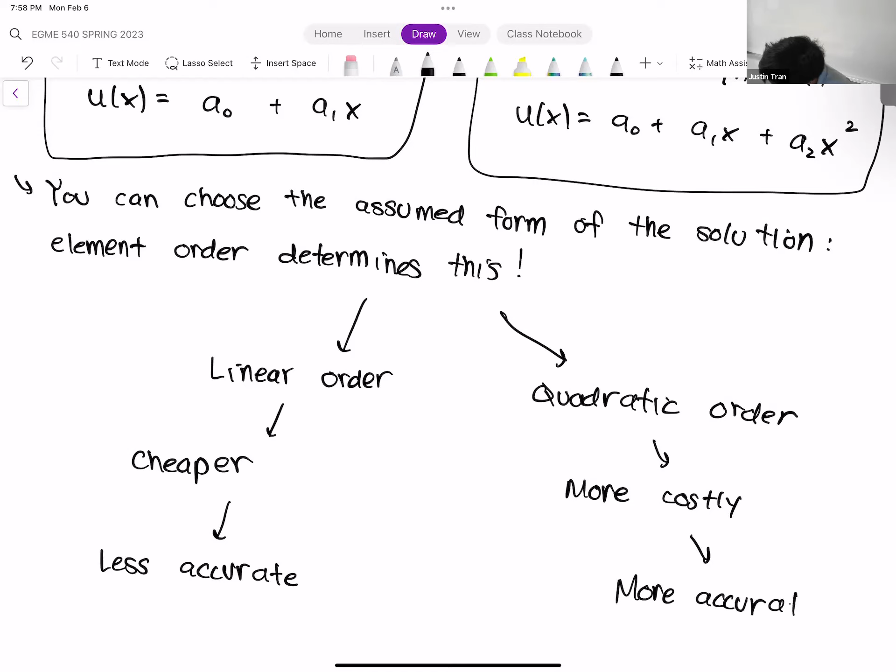So quadratic must mean the opposite. Quadratic order generally is going to be more expensive, but it leads to a more accurate solution.

Dr. Chan: So you having presented this information to us, I'm assuming that we use linear order for linear cases, obviously. For nonlinear cases, is that to say that we would use a quadratic order for nonlinear cases? Actually, generally for structural simulations, most of the time you're going to pick quadratic order.

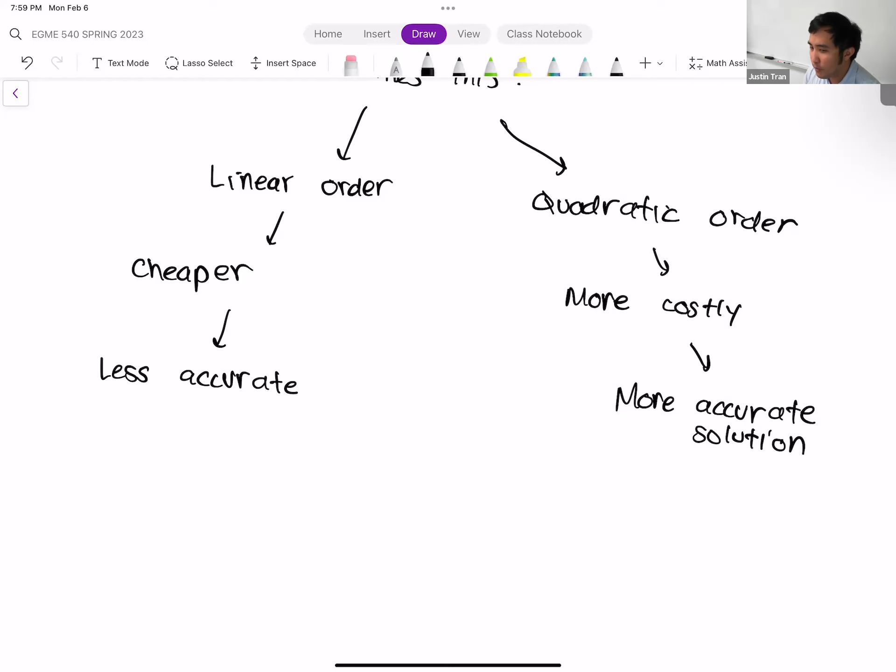And the reason for that is that there's some other issues that can happen in structural simulations. In structural simulations, you can have something called shear locking, which basically is if you have a linear element and your mesh resolution isn't high enough, the elements can literally lock up on themselves, and you'll get a solution with a very small, mysteriously small amount of deformation.

Kind of the way to avoid that is to use a quadratic order. I see, thank you sir.

I don't want to waste any class time, but I'm thinking about nonlinear cases. Is FEA used for nonlinear cases? It is, yeah, and we'll be going over that later on in the course too. I think we have a week where we're talking about nonlinearities in FEA, what those mean and how we deal with it.

And for those cases, you definitely want to use quadratic elements, because the linear elements are not going to be able to capture it. Sounds good.

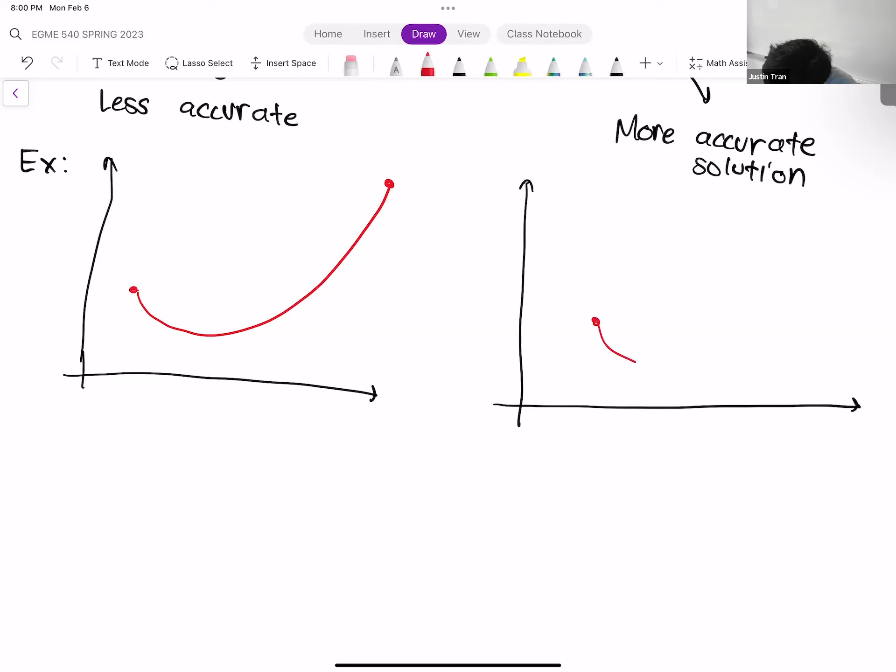Okay, let me give you a visual representation, because it's one thing to talk about it, but it's easier to visualize. Let me draw two curves here. Let's say that we have a solution that we're trying to emulate. I'll draw the same thing on both graphs. In red right here, we'll assume that this is a solution to the differential equation that we're trying to emulate. We'll call this the exact solution.

So if you were to solve the equation by hand, you would obtain what's in red right there. I just have to tell myself not to use red and green, because of color blindness. And in blue right here, what I'm going to draw is what you would obtain with an FEA solution. On the left here, we're going to draw a linear FEA solution.

A linear FEA solution is going to assume that your solution in this region is a linear function. The linear function just looks like a line, so it basically would look like this.

Whereas on the right here, I'll illustrate what a quadratic FEA solution looks like. The main benefit you get for using a quadratic order is that your solution could actually have some curvature to it. That's literally impossible with a linear function.

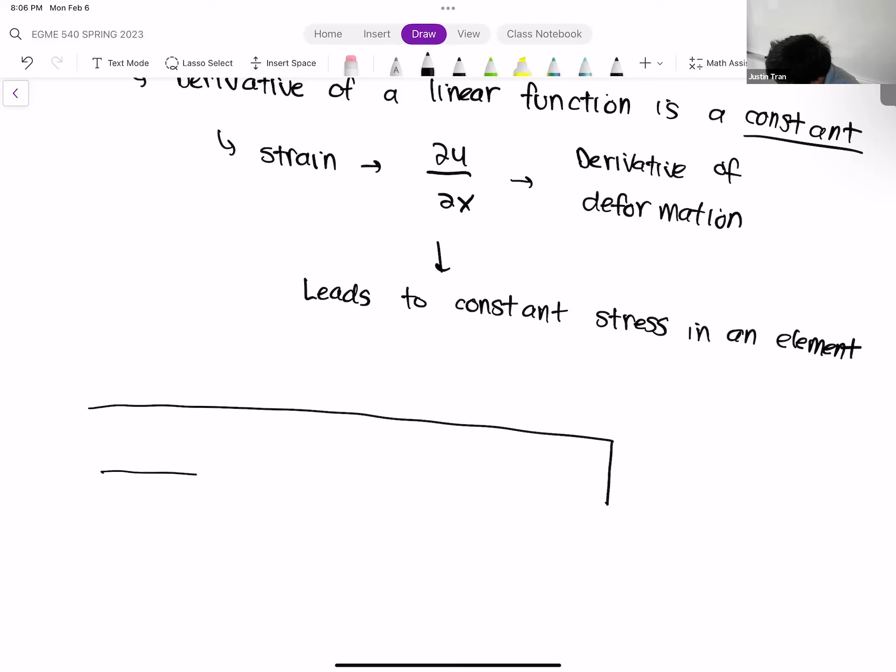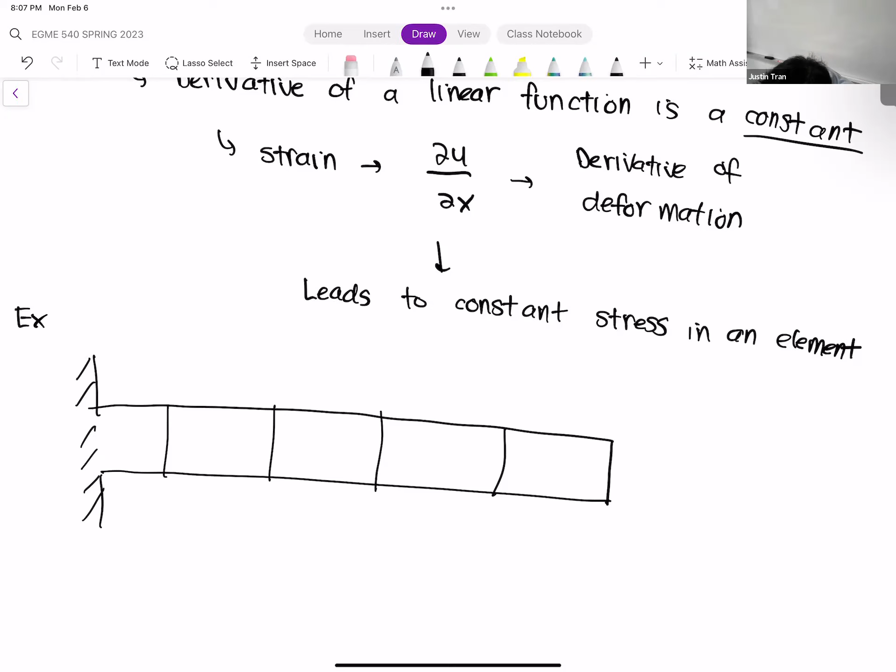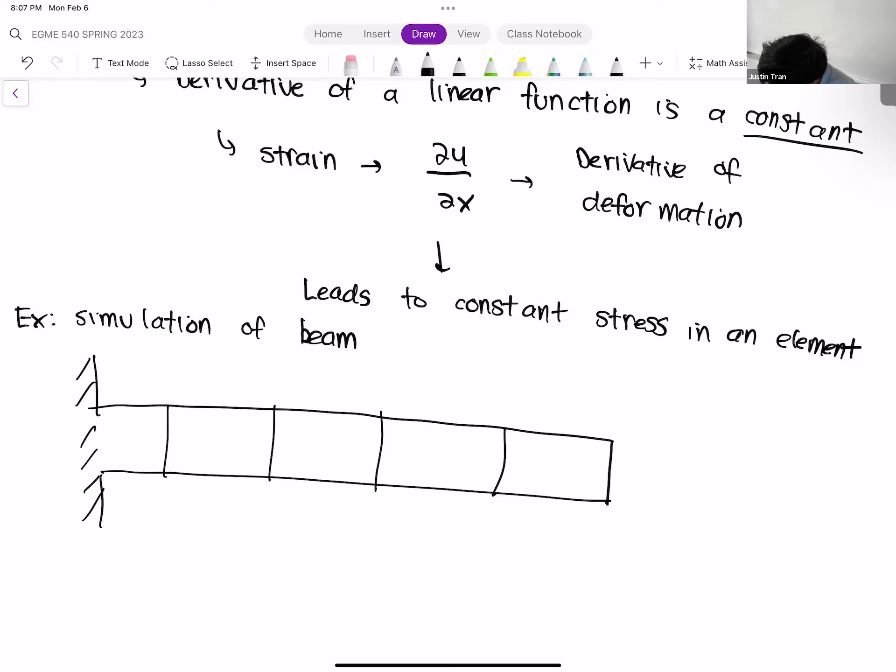So I'll give you a visualization of why that's an issue. Let's say we're doing a simulation of a beam, and say I've broken up the beam into elements like this. Normally, to load this beam, let's say we apply a force on the end.

What's going to happen is that this beam is going to deflect, right? You apply a force at the end, and we know the end is going to tip downwards. What's causing that, or the relationship we're tracking with the equations, is a relationship between stress and strain within the beam.

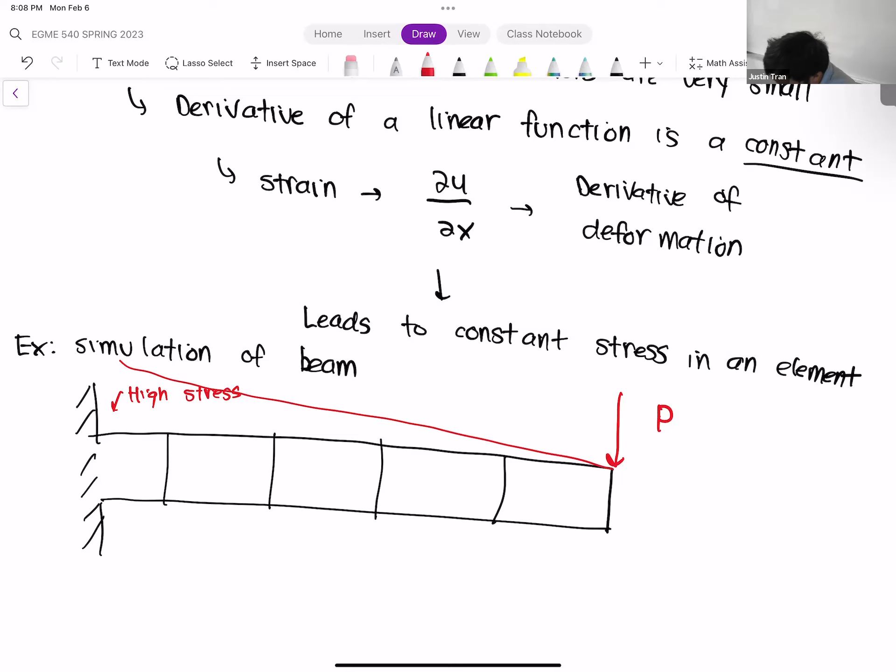So what you should see normally is a variation of stress. The stress should be the highest here, and then as you go down the beam, the stress will gradually decrease.

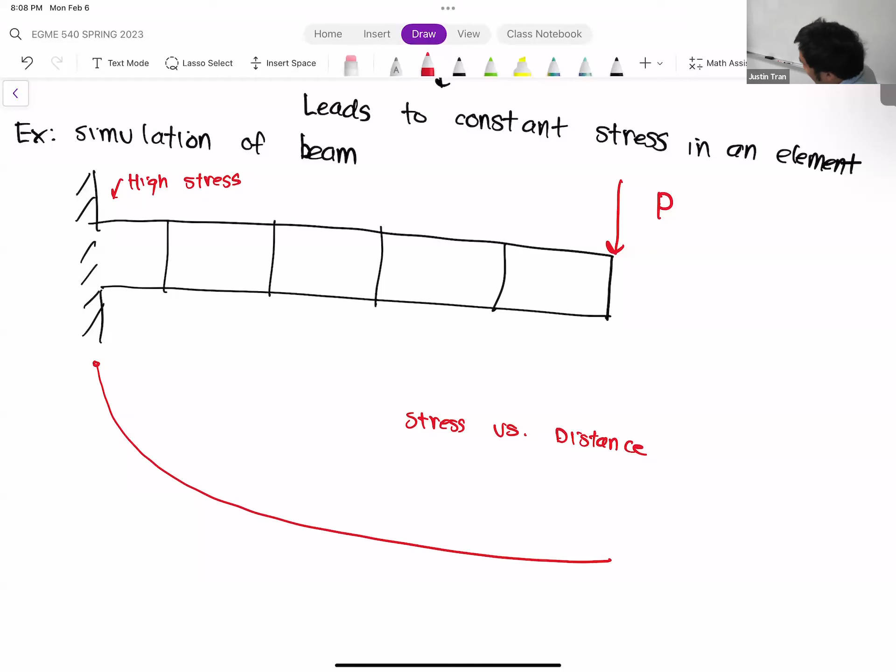Except the relationship isn't really like that. What you're going to see normally is something like this: a very high stress at the fixed support that drops off very quickly. So this is stress versus distance.

What happens is that if you have a linear element in this area, you can see here that as you go from one end of the element to the other, the stress in reality varies quite a bit. And that variation of stress is kind of what drives the deformation.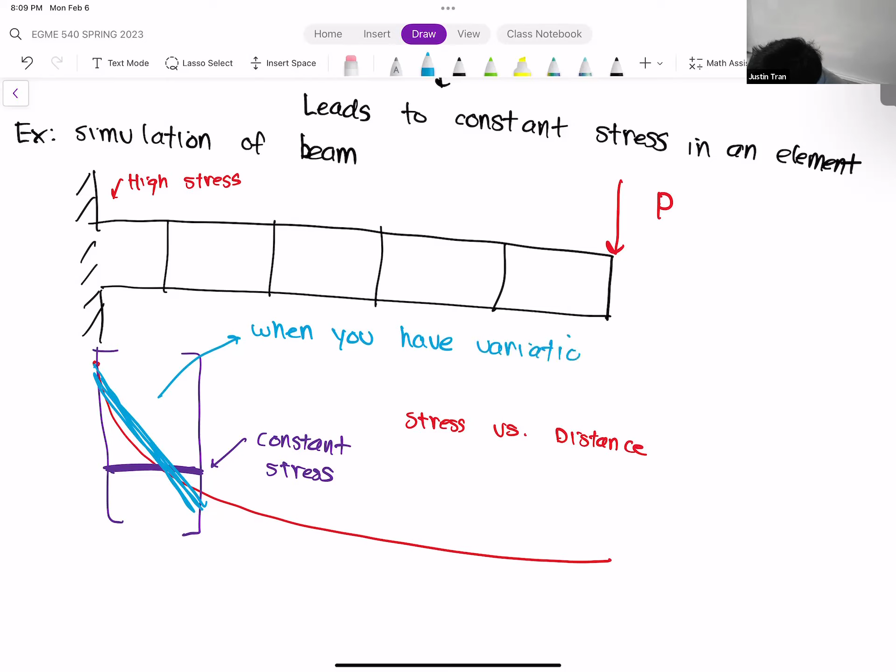But if you have a constant stress element, you may estimate the stress as something like this. If you estimate the stress as that low, you're getting a very inaccurate result, because what we should see is that stress varies a lot throughout the element, but we're completely missing that with the linear element. If you were to have a quadratic element, you could at least have some variation—maybe the stress might go like this. It's still not perfect, but at least you have some variation. So when you have variation of stress within the element, it's much less likely to lock.

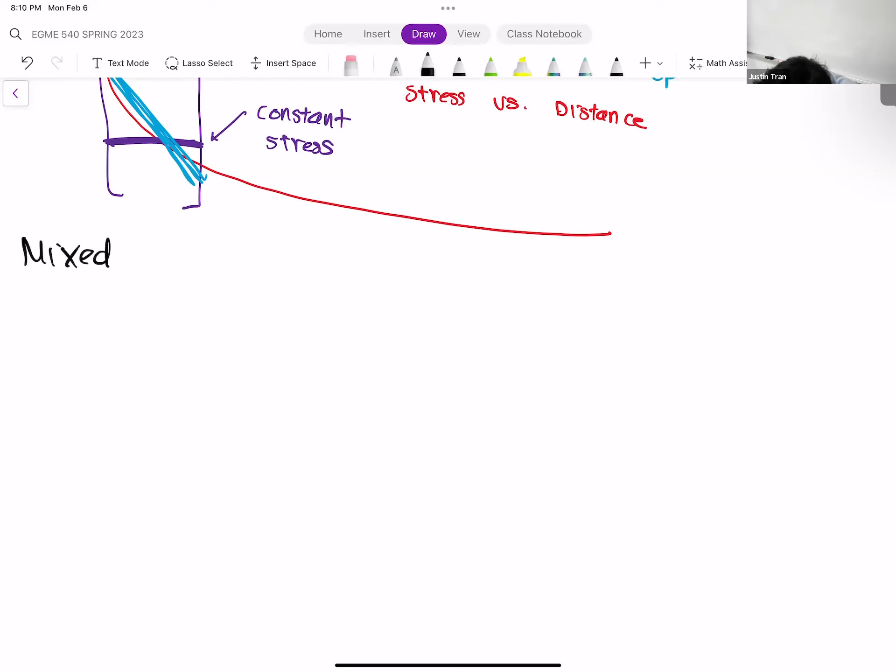For that reason, when you think you're going to have an area of high stress change, where the stress is varying very rapidly, you want to use a quadratic element just to make sure you can capture that change in stress. Any questions on this?

Okay, so one last thing—we have 5 more minutes, so I think that's enough time for mixed meshing. Let's talk about this idea of mixed meshing. We've talked a lot today about all the different settings you can have with a mesh. We first talked about the size of the elements, then the shapes, and finally the order. So there's a lot of decisions you have to make for the elements.

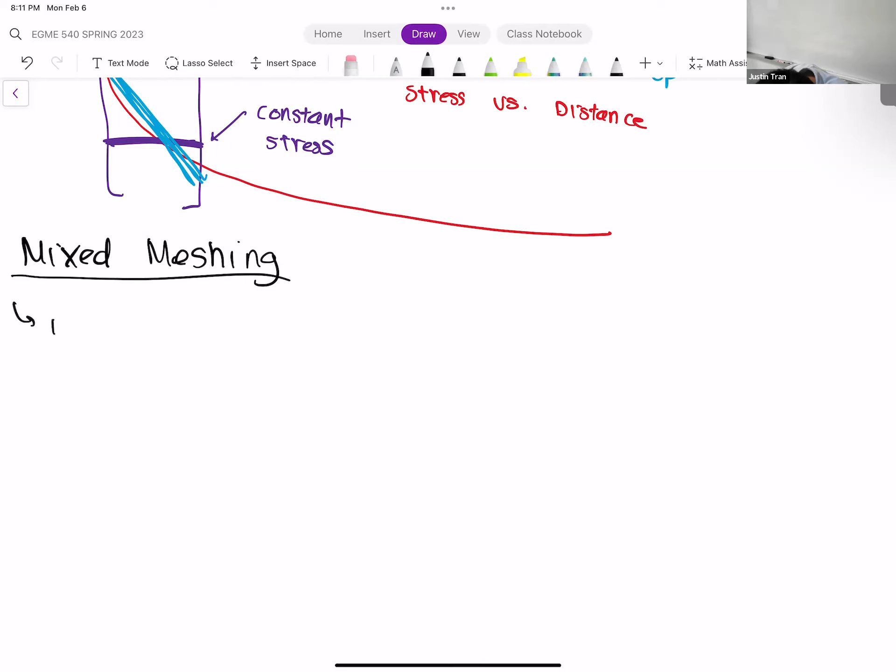And for a lot of cases, there is a preferable choice—generally we prefer rectangular elements and we prefer quadratic. But there might be situations where there are certain parts of your geometry where you want to make one choice, and other parts where you want to make another choice. The beauty of using a commercial software like ANSYS is that it's very easy to mix and match different mesh settings for different parts of your geometry.

Okay, so to accomplish this, you can use a lot of the settings and tools that we used in the first activity.

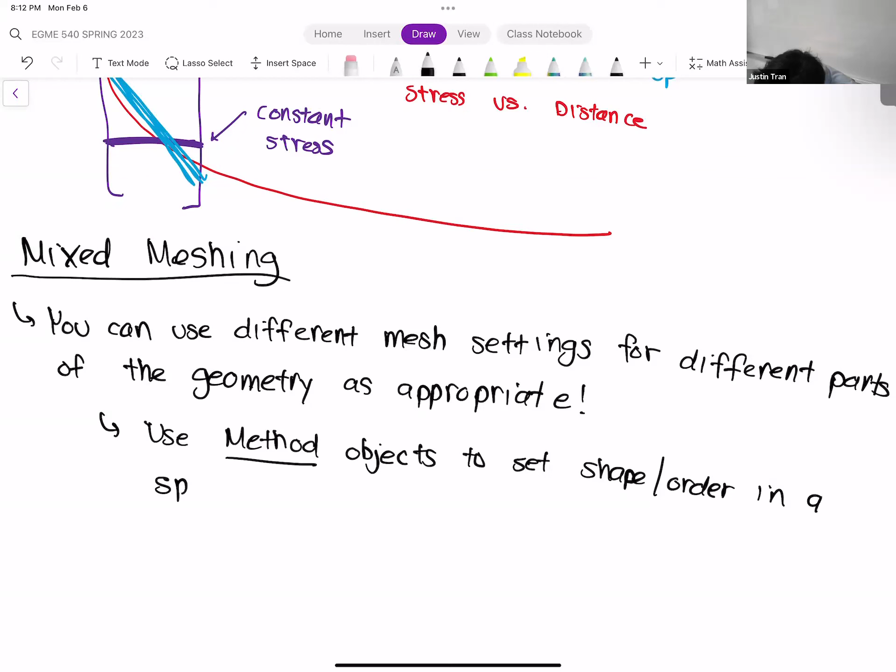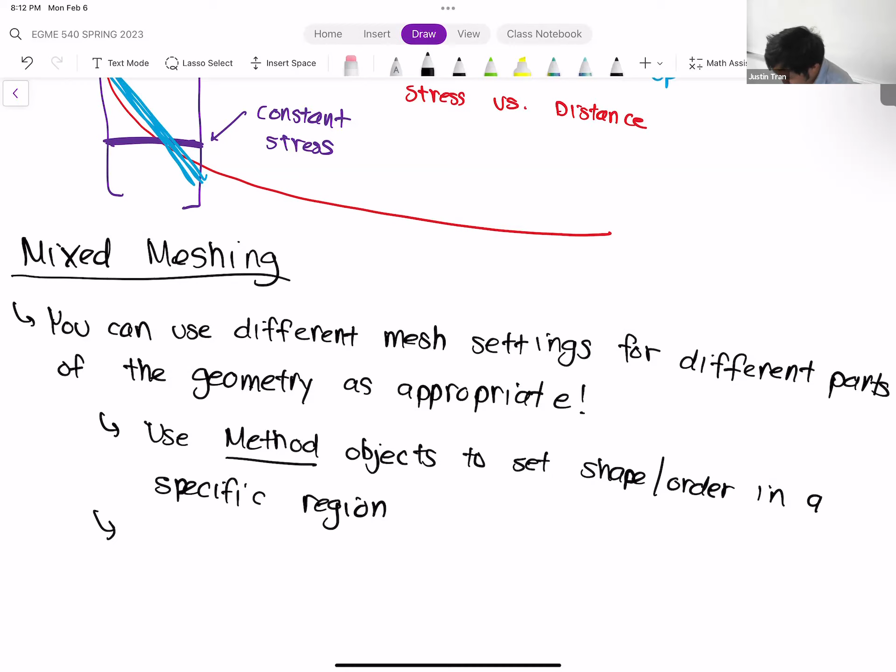If you want to change the shape or the order of the mesh in a particular area, you would use a method object. The method will let you change those things.

The other main one that you'll use is the sizing object. The sizing object will let you specify a different mesh size in a certain region.

There are some examples of cases where you would want to use this. Let's say that you have a particular area of the mesh or geometry where you want higher accuracy.

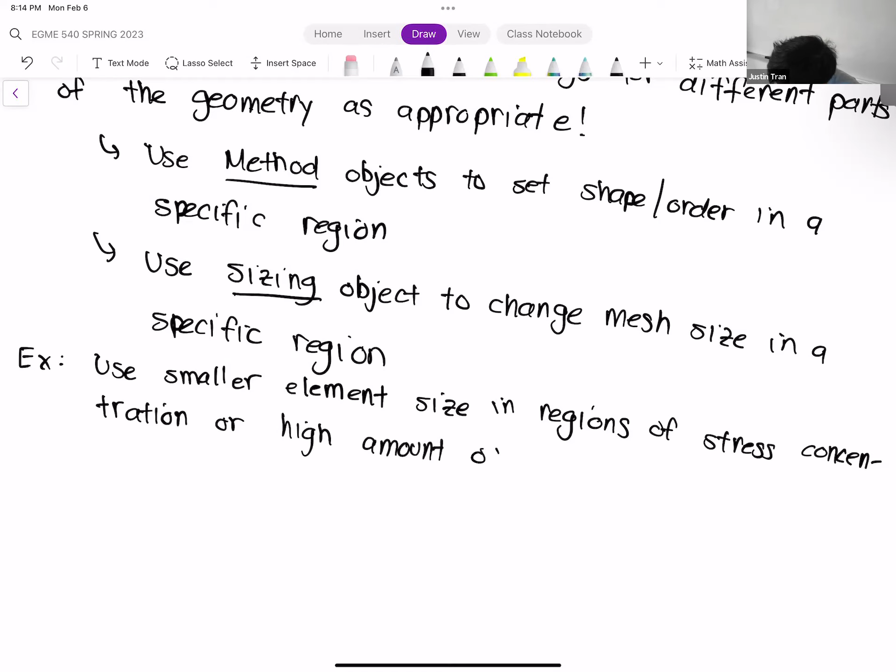Some situations where you might want to do this are, maybe you have regions of your geometry with a high amount of stress concentration, or regions where your solution is changing a lot, like rapid changes in deformation or stress. Usually you want to pack those areas with a high amount of elements to capture that change accurately.

For example, maybe you have different parts of your geometry with different geometrical features.

Like I mentioned earlier, you may have a region of your geometry that's very blocky, so rectangular elements are probably going to work out in that area, whereas you might have a region of your model with lots of curved edges, and maybe you want to use triangles there as well.